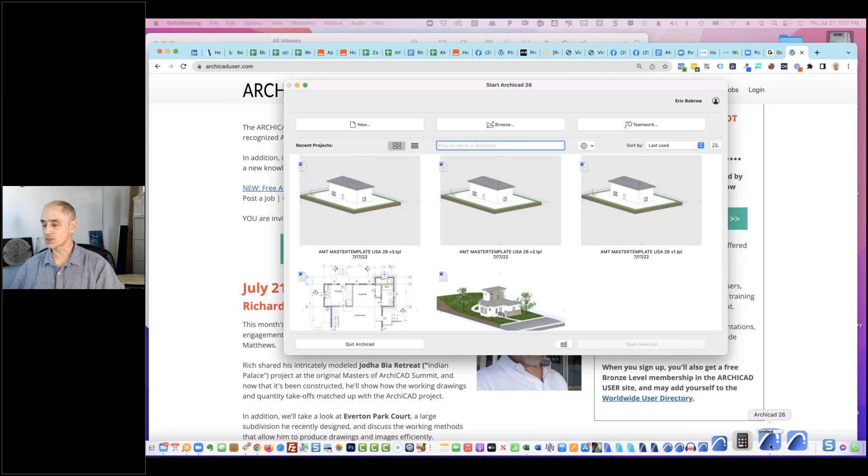All right, so first of all I'll create a new project using the Graphisoft standard template here. I'm using the US version. I've been looking at the international version as well, so that I can support all of you who are in other countries.

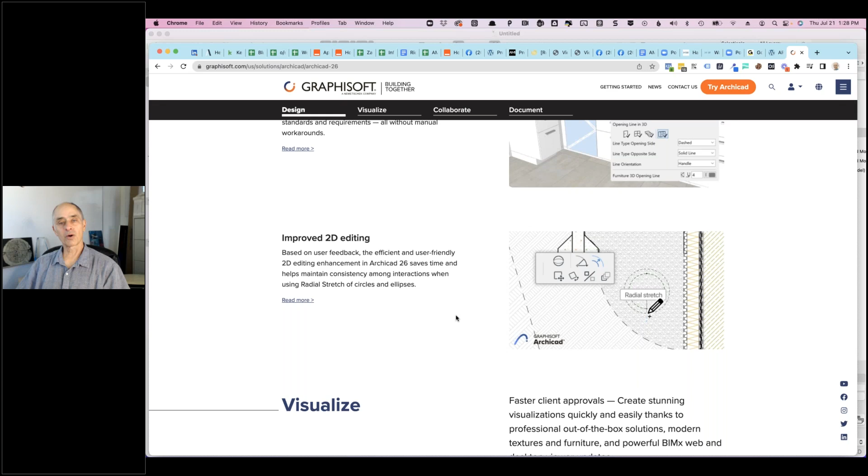Not something to write home about. Improved 2D editing - they only demonstrate or talk about this thing where you have curved elements and you're getting a copy of something that has a larger radius or a smaller radius. I don't know if there's anything else in here, but several veteran users said, oh boy, if that's what they're shouting about, they didn't do very much about anything else. So anyway, I'll be looking to see, because occasionally there are things they don't put in the headlines, but then you find out later, oh, it also does such and such.

All right, so I'm just going through what I see here. Visualization - okay, so they have a new, improved surface catalog. I have not experimented with that, but the images are starting to look better and better. These are native within Archicad.

Well, BIMX - I don't know how many of you are using that, but you can export your model in an independent file that non-Archicad users can access, whether they're clients or consultants, and move around in 3D. They've improved the visualization, and the images I saw were like, oh wow, this has really gone from total cartoon to something sort of like a video game level of realism. So I think that's nice, because expectations of visual representation are getting higher and higher as we see more movies with CGI, computer graphics stuff. Anyway, they've got some stuff with BIMX that looks pretty good, and if you look at this, it looks noticeably better than previous versions. If it's just easy to export that from your Archicad model and send it to a client so they can walk through the current version of the design, I think that's pretty good.

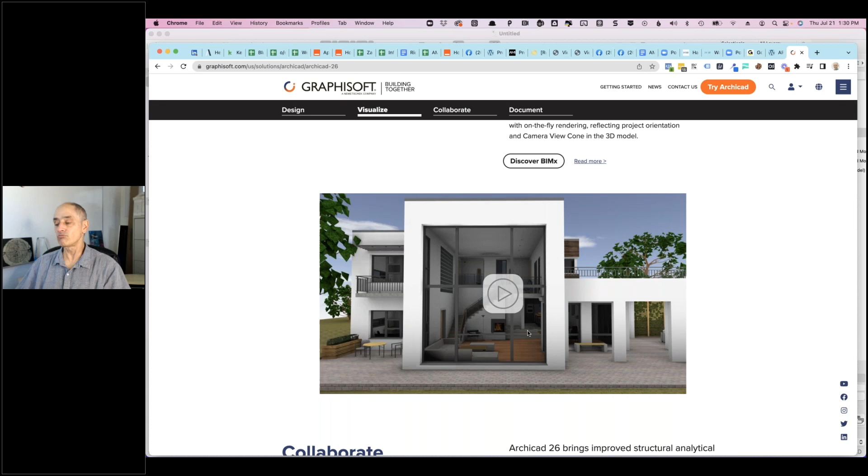The collaboration talk covered some of the underpinnings of the ability to share the virtual building model, the building information model, with other disciplines. I have not looked at how the collaboration tools work, but in general I'm sure they're resolving some issues in terms of file size and speed, while also managing the different representation styles required for different disciplines. And ultimately, the ideal is that other disciplines can use their own tools but participate in an actively evolving digital model, with as few compromises as possible, so that all the stuff you want or need to see is there.

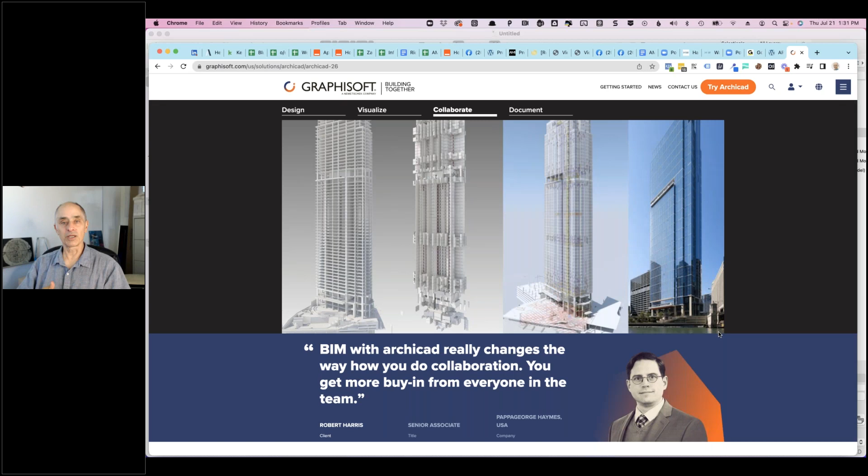Okay, so they have structural workflows and load calculations here, or at least putting in some load information and being able to update that. And I have no idea what FRILO is - I mean, it's some tool that Nemetschek, I think, has, for structural analytical... I don't know what the F is, filter or something - SAF, structural analytical something. All right, support for multi-segmented columns and beams - these were introduced a version or two back, and apparently that now can handle the structural implications of that.

BIM Cloud is Graphisoft's tool for managing shared projects in this digital model that multiple people or companies can participate in. So some of these things you may never use if you're a sole practitioner, or you just have two people in your office each working on your own project, or you open up a project and work on it and close it and somebody else opens it. You may never use BIM Cloud, but I have heard good things about their service.

So whether you're wanting to share within an office or with a remote workforce like we've had in COVID so much, or just simply having outsourced people in different locations, you can now request and pay a very modest amount to have your project or projects up in the cloud that Graphisoft manages. And then you get access, and your team can get access through the cloud. Last I heard it was something like $400 a year or $75 a month for that access. Check with your Graphisoft reseller or rep to find out about it. I think it's pretty cool that you can pay for a reasonably priced service and collaborate remotely.

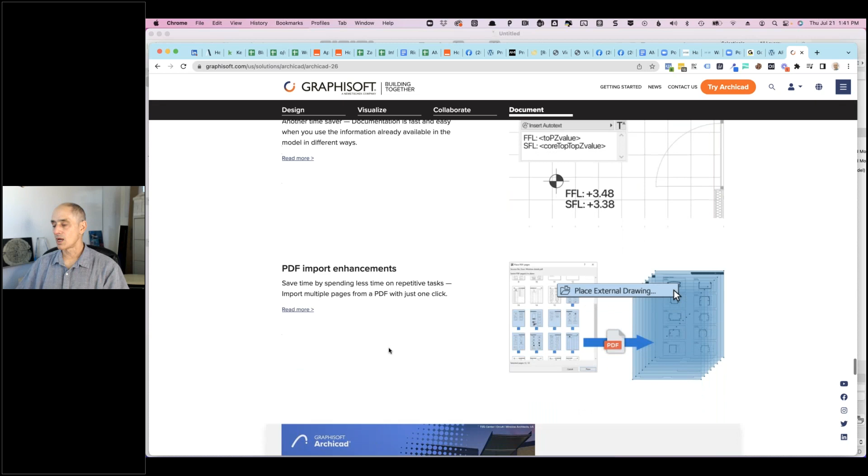Resolves an annoyance. PDF import enhancements: you can now bring in multiple pages of a PDF instead of one at a time and lay them out on a larger sheet. I know people do that in California for Title 24 energy efficiency reports, which may have 3 or 6 pages on a layout. Instead of importing multiple times or dragging copies and fixing which page goes where, now you can select all of them and it will lay them out. Given that we already have auto layout features that create new layout sheets, you could bring in 10 or 20 sheets at a time and they would create new layouts as they fill up.

So that's an overview of an overview, and my perspective on some of the things I see as more useful and less. I'm going to check on questions to see if any of you have questions on what I said or on Archicad in general.

Then I will talk a little bit about project migration - in other words, how do you take your project from 25 to 26, or from 20 to 26, and what things to be aware of, at least the things that I know at this point.

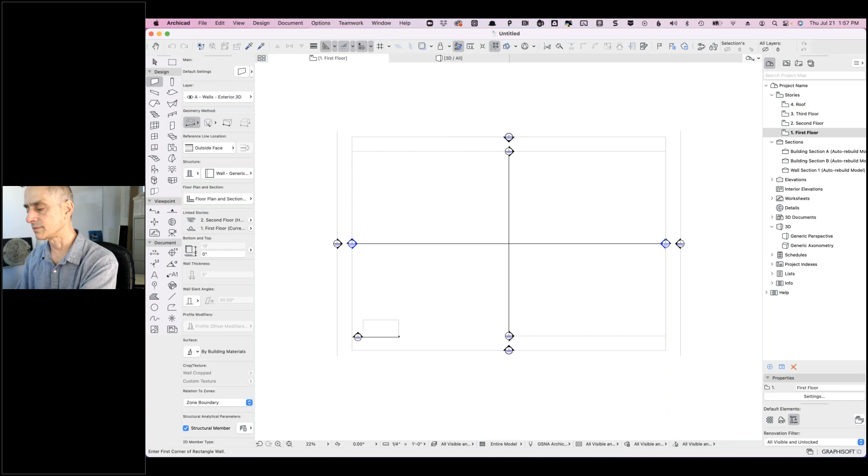Let me go here to master template sample project. Let me open that here. Actually, that's a template. Let me get the sample project open.

So the question is in terms of seeing zones in sections and graphic overrides, that'll be what I focus on for the next few minutes, and then I'll talk about project migration things.

But this, yeah, this is not a sample project. This is just a small piece of building to give some context when you first open up master template. Let me open up the sample project here, which gives me a good context for answering questions.

For those who may not be familiar, master template gives you a starting point for projects. It doesn't provide a project itself, you'll be putting in your own project, but I do have a sample project developed a few years ago by architect Scott Bulmer in California, who was working as a consultant for me at the time. It's a little California bungalow.

It provides context for showing what graphic overrides will do, or other things, and shows how you can create complex profiles to make beautiful sections, etc. I use it a lot as part of my teaching because I've carefully cultivated lots of different pieces as an educational tool.

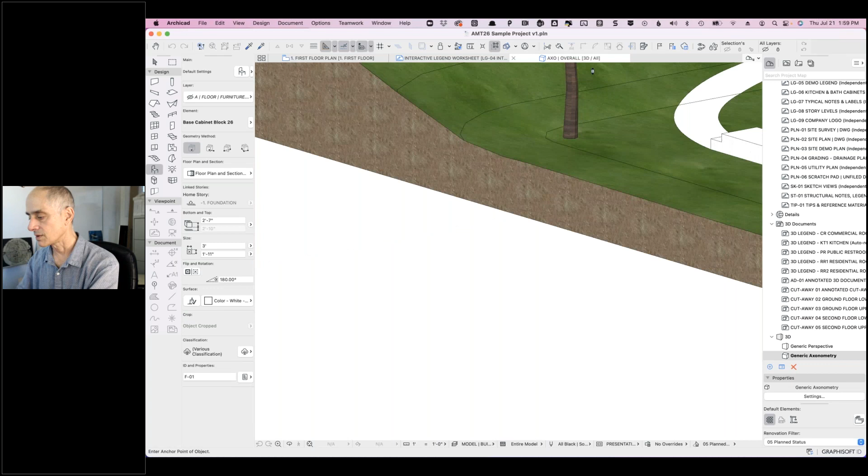So for those less familiar, the project itself here—I'm trying to get it—there we go. Okay, so nothing too imposing or dramatic, but it has a lot of little fine details here.

Now I'm going to show one example. I hope this is fully set up—sometimes I try to demonstrate something, and because this is now in version 26, maybe something isn't going to work. But let me do this in terms of more 3D views here.

3D styles and model variations. Let's see there—color pen, no, let's see. Oh, actually, let's just see. This would be energy here.

Okay, so you see here, this is one of the new features. I'm trying to find a particular view, and in this case I typed in the word energy because I knew I have some reports here, some schedules that are about energy analysis. If I go to energy summary like this, it's not an exhaustive energy summary.

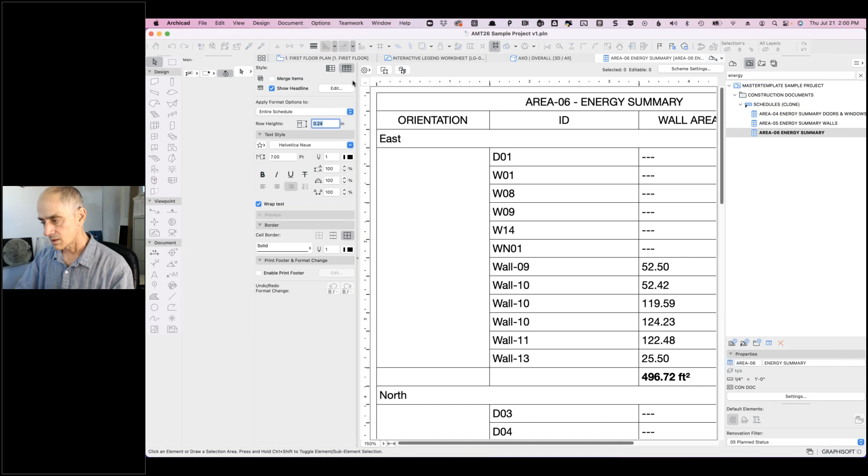What it is in this case, we'll just—I'll shrink this down here. We have a bunch of doors and windows and walls designated as east, some designated as north, and some designated in each of the directions, south and west. This is able to calculate the area of the walls and the area of the openings.

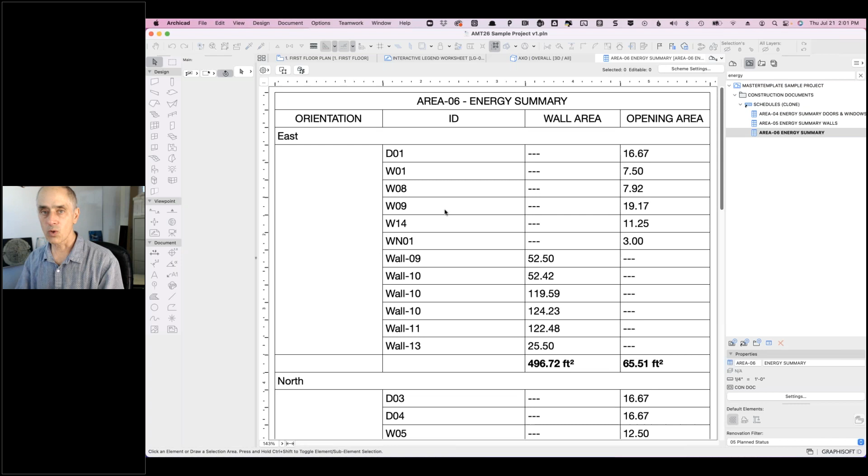This is useful information—it at least contributes to some of the data you'd need for energy analysis in the state of California. You're figuring out how much glazing, how much non-insulated area there is, and you can calculate based on it. Now, of course, how does it know that a wall is east, or a window or door is east?

Well, if I go to this wall and say show it to me on the plan, we'll see this wall is highlighted, okay? And this wall, I've manually gone in and set up a custom field. In master template, I've got custom fields specifically for this purpose, or custom properties. One of them, in terms of AMT as Archicad master template, is the orientation, and it says the orientation is east.

Now I can choose one of the other directions, and I can also say, hey, it's interior, meaning it's not relevant to this type of exterior calculation. And when we first draw a wall, it'll be undefined—it will not be any of these, and therefore it would not show up in the schedule because it's undefined.

Or it'll show up saying undefined, and then you can go find them and make it right. Now is this east? Well, in this sample project, east is to the right. Do I have all of the walls designated properly? It'd be tedious to go and select each wall, particularly in a large project.

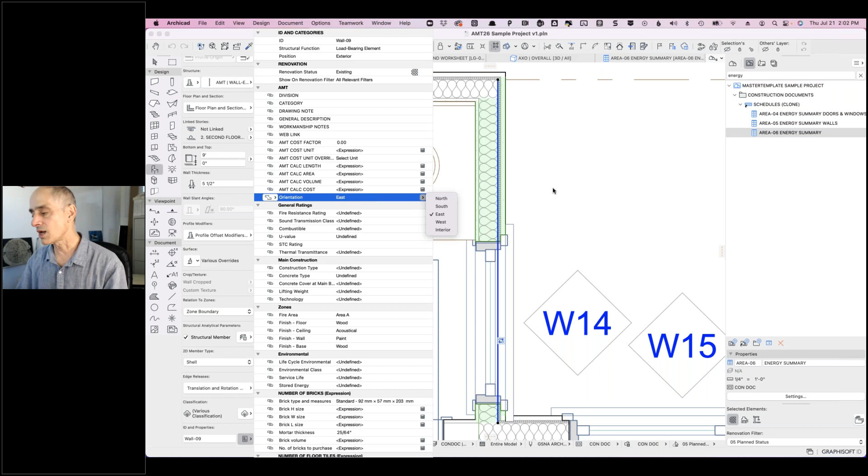So it's nice to be able to visualize this in 3D to check if I'm getting it right. So if I go to the 3D view and take a graphic override here that is energy orientation check, this is going to instantly recolor the walls and doors and windows to indicate what direction has been designated. So I'm going to click on this, and you're going to see.

In this case, it apparently is... I don't have this set up right in this sample project. Something went wrong here because they're all the same color. Let me go to the graphic override rules and fix this. Hopefully I can do this quickly, and you'll learn a little bit about the rules.

If I click on this little button here next to the pop-up, that is the current graphic override. I have something saying: if the orientation is north, make it this color; if the orientation is south, make it that color. So these are some visual text representations here and some visual images.

Now let me check. Let's say, I think this should be south. So why is the south not this color? Let me click on it and see. It says if it's a wall, door, or window and the property is something, then it'll make it the right color.

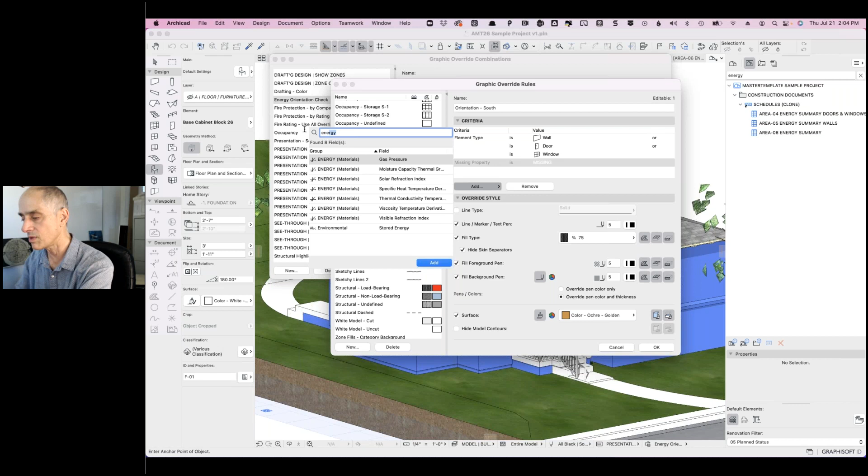So for some reason this missing property means something got broken along the way and I need to fix it. So what I'm going to do is color it this color when the property is energy. Do we have stored energy? No, maybe it's orientation. It's orientation.

So you can see I can type in a search here. I think you could do that already, but I'm not sure—maybe this was added as well. So I'll say the orientation is... and it says this rule is for south, so I'm going to fix that. And then I'm going to get rid of this other one, where the property somehow got removed and I didn't fix that.

All right, so now when I do this and say okay, we should... maybe we have to rebuild here. Refresh, rebuild. No, all right, well that didn't do it. Let's see, what direction is this? We'll see if I can get this.

This orientation is east, okay, and this one the orientation is south. Okay, so we have east and south. Let's just see, the south should have changed color here with the energy orientation check. Okay, well, let's see what's going on.

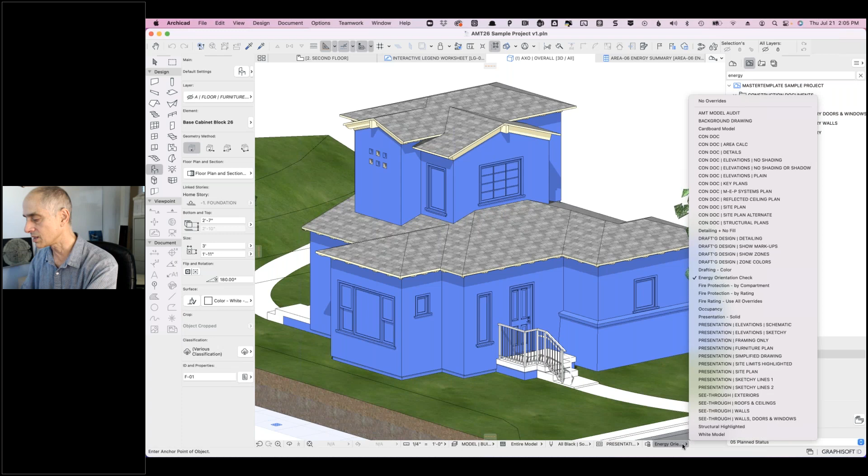So it should be: energy orientation check south should have this color here. So if it's a wall or a door or a window and the orientation is south, then we want to change the surface here. So that should work. I'm just going to fix the other ones quickly because now I know what it is.

But for west, we're going to add orientation, and this is going to be west. And then I remove this one—it's one of these, or more of these—and this, yeah, this should be all right. Yellow. And let's go to the east.

Missing property—so it might have to do with the last one that was missing. I think I have to fix them all, which will just take another 30 seconds here. So I'll remove this and add orient here. If I can pull the rabbit out of the hat, this will be great.

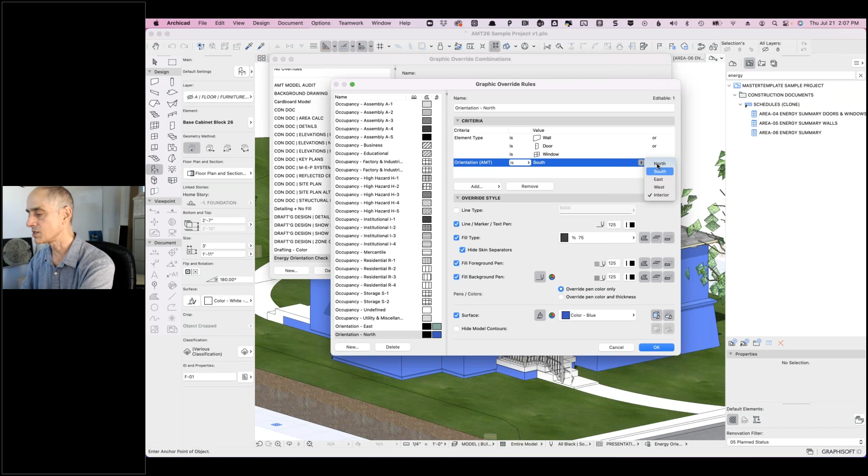East here. And then I think this north one—the problem is that it's applying after all the other ones, and it was basically applying to all the walls. So I'm going to say add again here. Hopefully this will be clear in just a moment. This is going to be: if the orientation is north. Okay, oh, okay.

Hooray. Rabbit out of hat.

Okay, so what this is, basically, when I go around, we can see, did I get all of these in the right orientation? Clearly I did not change the model or redraw the walls. I simply said for a certain type of presentation or study purpose, I want to make sure everything makes sense. So let's take this window and say it's actually not oriented south. Let's say I accidentally had it on east. Now when I'm looking at it, we're gonna see it jumps out. Hey, that's the wrong one, it's not matching there. So I can go in and find the ones that are wrong and say I really need to change this to, I think it was south, if I'm not mistaken.

Let's do that. And I can select multiple ones like that. So this is one graphic override. The rule in a graphic override is you say a rule looks for certain types of elements, and then if it matches that, change its appearance, at least while this override is active.

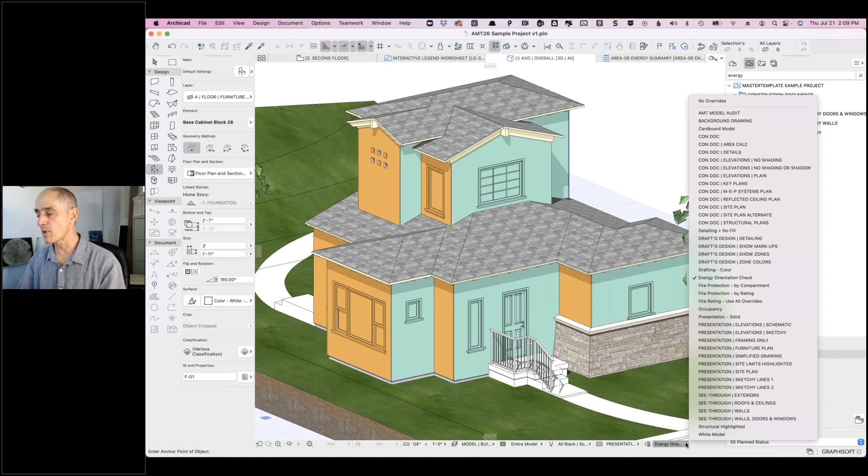You can use this for different purposes. I'll show you another one that's more dramatic. Another one here, we can say cardboard model. That changes the look of everything. What is it doing? The cardboard model says that if it's an uncut surface—right now we're not cutting through anything—the rule is: anything that's 3D, give it a white color. So that very simple rule did it. And there's a separate one for when you cut through it.

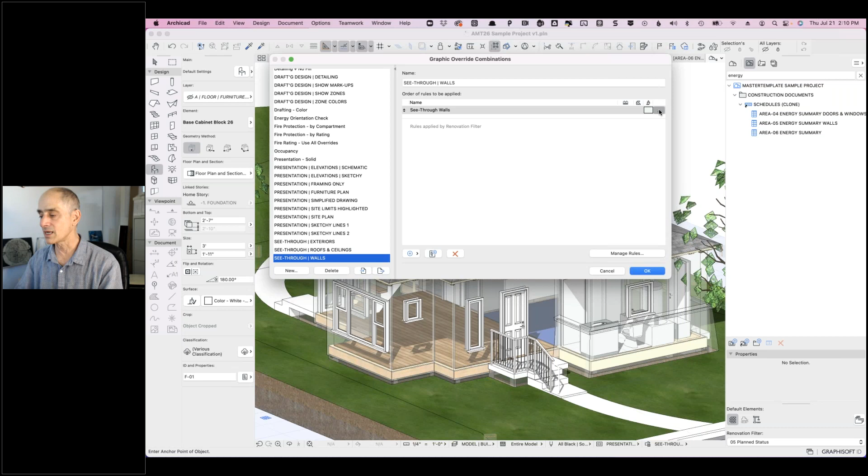Now let's look at another one, more for see-through walls. You can see now we're looking at the building somewhat like it originally was, except the walls have been turned into glass or airspace, I can't remember which. We'll go in here and say see-through walls. The rule, which I can look at or edit, says if it's a wall, make it clear glass, which is different than airspace. With clear glass you can actually see just a little bit of a haze there, as opposed to airspace, which would mean it totally disappears.

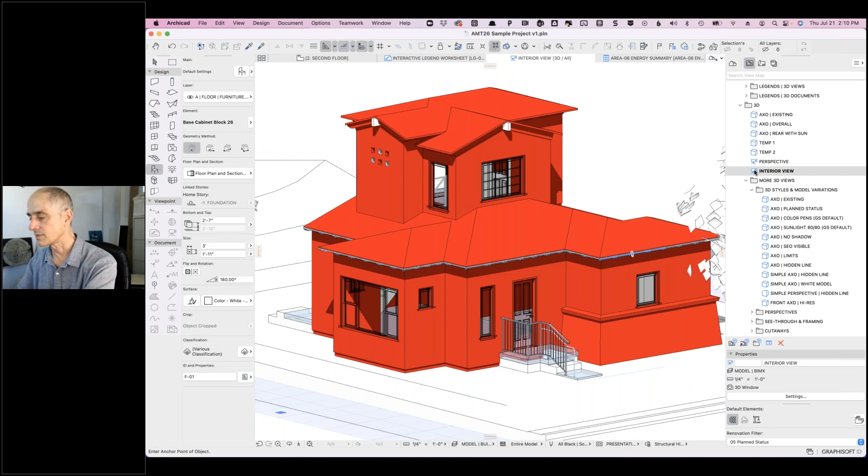Now we can use it for things like structural. Let's see, there's structural highlighted. So all of these walls are structural, but inside the building—now if we were to take an interior view, let's go to an interior view here. This turned off, that saved view turned off the graphic override. If I say give me the structural—where is it—structural highlighted. We'll see what's structural, so the furniture, of course, is not structural. And then I think here there are some interior partitions not designated as structural, and I don't know, maybe the stairs should be considered structural. I don't know, this is just a demonstration file, so it's really just to show different things.

If we go to another type of graphic override, used in plan—let's go back to, say, the floor plan, here, first floor plan, and we look at it. So what are we seeing right now? We're seeing the walls with some detail indicating that they're insulated, that they have certain skins. Well, with the graphic override, we can say, I would like to have this look like a site plan. All right, so now it's just empty walls. We're seeing some grid lines through here, but basically they're empty walls because we're designating the change in the look there.

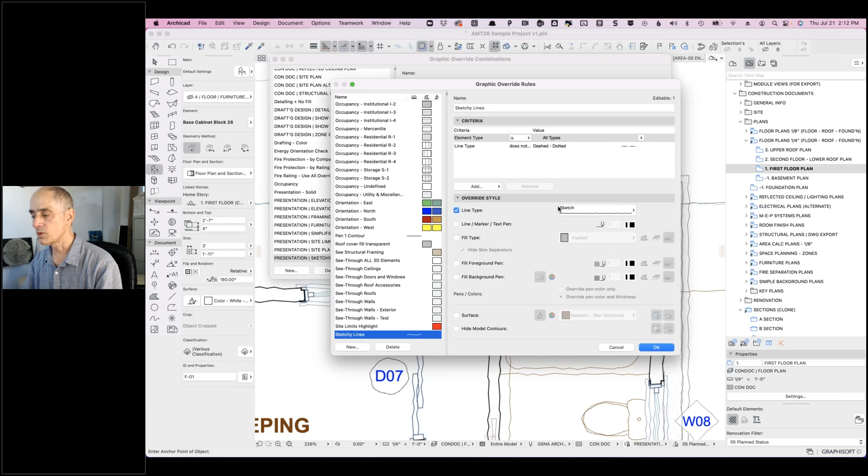Or if we look at something like a sketchy line, this is actually something that goes in and says—let's see, wrong one here—I would like to change the lines that normally would be straight into a sketch line. So those are a few different examples.

We can also have the same thing preset in a view. So if I go to an elevation, let's see, sketch and schematic. In master template, I have a bunch of examples here, so schematic elevations. If I take an elevation here, in the schematic version it removes the details of the doors and windows and just makes everything plain white. Whereas in the sketch version of the same one, it makes it a little bit wobbly, which, at the right magnification, can give just a little bit of a hand-drawn effect.

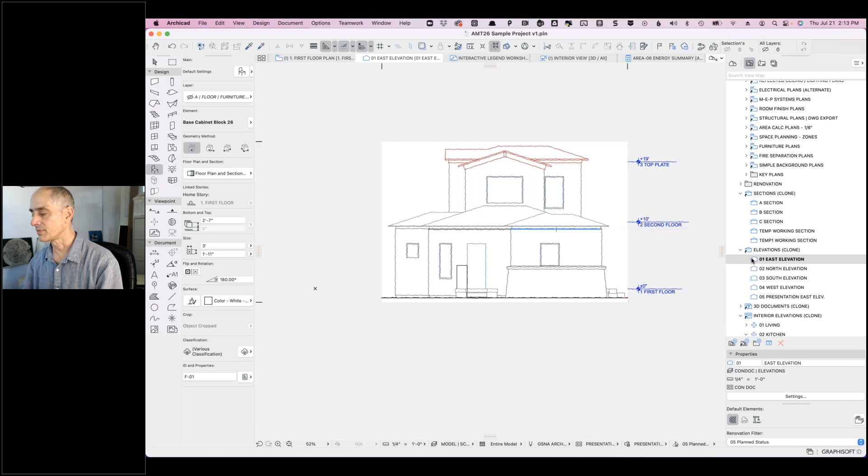And then of course, if I turn that off, if I have the elevations without that, then you can see that this is now showing more detail, and of course a more traditional sort of view.

All right, so hopefully that explains graphic overrides. Now, what's new in 26 is, if I'm in the graphic override dialog here and I want to add a graphic override saying I want to do more things, instead of picking one at a time, you can pick several things and then add them. So sometimes you want to compile a bunch that will all add up, and now you can select multiple rather than doing one at a time. I think that's the main thing. They also changed it from edit rules to manage rules, a couple other small things there.

Now, viewing in section, the zone - I'm going to bring up a section here. Okay, so we don't know what room we're cutting through here and what room we're cutting through there, but there is a zone. Now, if I check the layers here, we have the zones. Our area identifier zone is visible, so that means my zone layer is turned on. But I don't see anything that designates what a zone is. Now I can't remember, let me go look at the section settings. I don't think it's in there, I'm not sure.

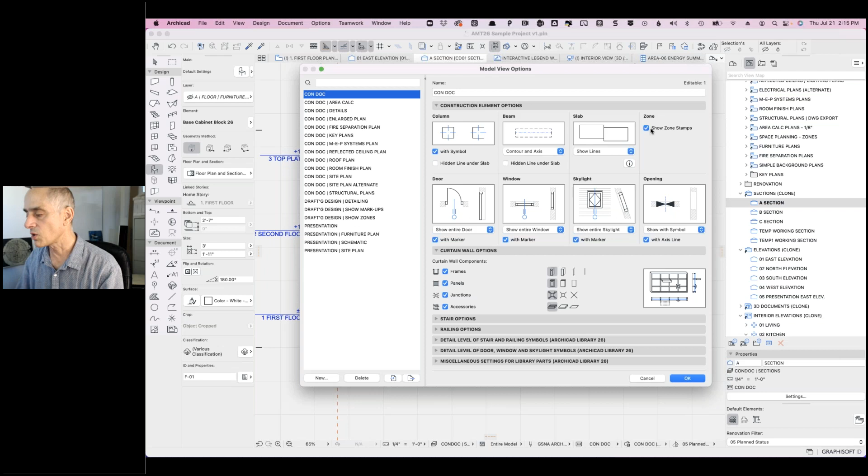Model appearance, where zones are - I think that it might be in model view options. Okay, where is it... shows zone stamps. Okay, so right now that would show it on the plan when we're in construction documents. So it's not there.

I'll select this - this is a wall. Yeah, there's not a zone that's visible. Trying to remember, is it under project preferences, legacy? Here, hide zones. Okay, so I think the default they have is saying people would get confused by this - if you need it, you have to turn this off. This says hide zones. Okay, so now I'll say okay.

Now you can see all of a sudden some of the information has disappeared, which is actually awkward, right? But now if I hover over this, what is this? It's allowing me to select a zone. Now, as a zone, I can label it to show what its name is.

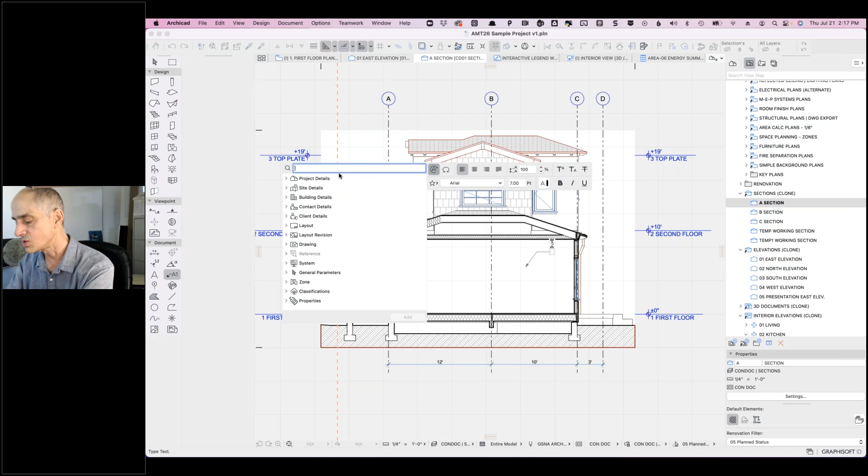Let me just show that. If I go to the label tool here, and hover over - let's say this is a zone right now, and right now it's got an arrow. I'll remove the arrow in a moment, but I'm going to go to the auto text, and we'll say zone here, and I want the related zone name. You can see it says sleeping. Okay, I don't want to do it twice - it just put it in twice there. Now let me get rid of the arrow.

My info box is - oh, let's see, I have to finish it. And then now I can select this and say, you know what, I don't want the leader line, I just want that, and maybe I want it in a frame around that. Now I'm going to eyedrop this here, and now I go over to this area and it says living room. So now you can see the power of it in certain contexts where you're cutting through sections and you want to say what the room is - room 105, or lobby, or storage unit 1, things like that. So this was a label that said show me the zone name.

Now, one thing we're seeing right here is that the zone is blocking the view of the stair, right? Now, I'm trying to remember what the solution is here. If I go to section settings, I think that if we turn on transparency - let's see, transparency - that might resolve it at the cost of some other complication. Let's say okay.

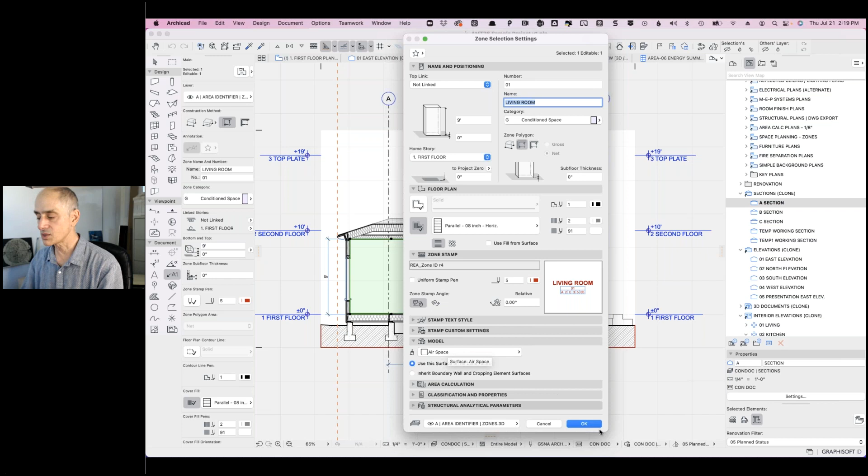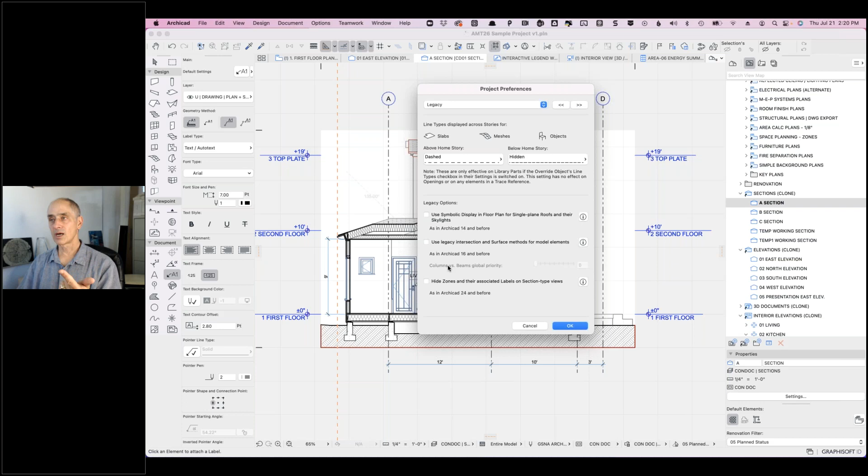Yes, so we're seeing through airspace, not glass. Now we're seeing through the zone. I'm not sure whether we're seeing through the window, because there's probably not a lot of detail behind there in this model, but there could be complications where we're seeing through doors or windows, and we don't want to. I haven't experimented with this too much, given the setting I just changed, which is in options, project preferences, legacy, and this is global for this project. If we say don't hide zones on section type views, we may have this issue that we're seeing through certain doors and windows, for example if we have transparency.

Can I turn off transparency? Let's go to section settings and turn off transparency and see what happens. Yeah, so we need transparency, and we need the zone to be set as a very transparent element, and that works nicely here.

We have two compromises. One is that if we ever do a bubble diagram with the zones in 3D to show the spatial usage, you may be limited to things that are very transparent as opposed to translucent, to be able to see through. Secondly, whenever you want to see these zones and you turn on transparency, you may be seeing through doors and windows to rooms beyond. So that's at least another potential complication.

All right, so hopefully that's of interest.

All right, so now I see some questions from Jacek and David Yaguchi and Saxon. Okay, so Suleiman asks, how do you activate the graphic override command?

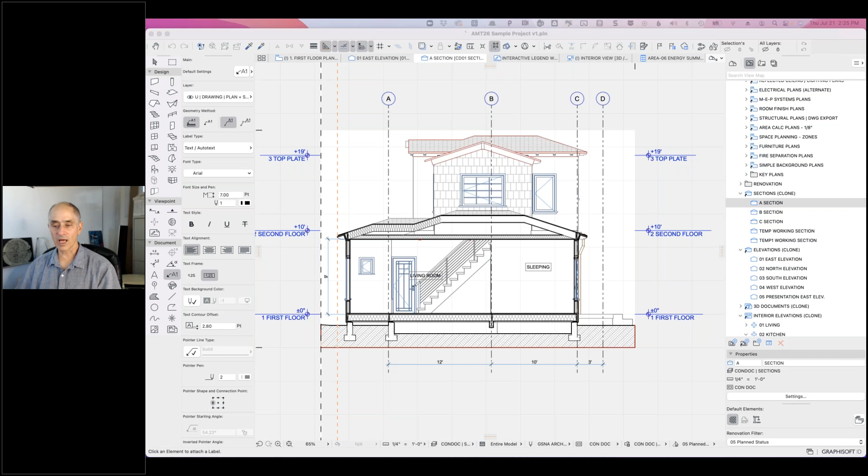Okay, if I set a project at a particular elevation above sea level in my location settings, and I want to change that elevation of sea level for my project to be higher, can I change that in project location, and will that automatically move my model higher? Good question. It's actually a little simpler than you might think.

Let's take a look. Well, we have this interior view - let's go to just an axo view. Okay, so we have a site mesh in this project, and if I go to the measure tool and hover over this, it says that this point in space is z coordinate -1'4". Now what is that?

So it's -1'4", so like half a meter down from the floor level here, down from the ground floor, from Project Zero. So how do we know what Project Zero is, and how do we get elevations related to sea level? If I go to the options menu, project preferences, and look at location settings—and this may have somewhat different names in other versions of Archicad, it might just say location, or project location—we can see the elevation. Right now this is set at 102.67 feet. You may recognize 0.67 is 2/3, so that's 102 feet and 8 inches above sea level.

Now if I go and select a wall—these all have our complex profile, but we'll just select this wall—it says its base reference is 0 in relationship to the Project Zero, and that it goes up 9 feet. Now I can also say, where is it in relationship to sea level? Remember I had it as 102 feet 8 inches. It's going to say that, 102 feet 8 inches. So it knows in relationship to sea level where we are.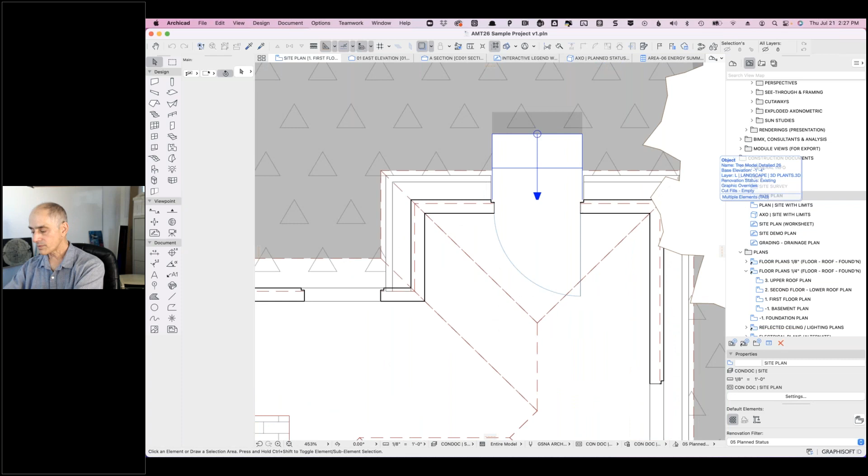Now, if I go to the site plan here—this site plan drawing has some spot elevations, 102, 104, etc., and 101.33, that's this. So when I put in a level elevation point here and just click to place it, it says 0.842 feet.

Now, what is that? Well, that means this is just slightly above—it's not quite a foot above the floor level. That's not too useful in this case, because for grade, we'd want to be in sea level. Maybe we'd want to say that a mezzanine or a landing is so many feet above the floor level.

But here I want to change it. So I'm going to select this marker and say, how do I want the text to be? It says single value—this is new in version 26—and I can say visible, top to sea level. This is brand new. There was a way to do this before by editing the text itself, but now you can change it right in the marker.

So now I change it to that, and it says 103.509. Okay, so it's the right number. Of course, it's showing it in decimal, which is what all of these are set to right now—we are showing elevations in decimal.

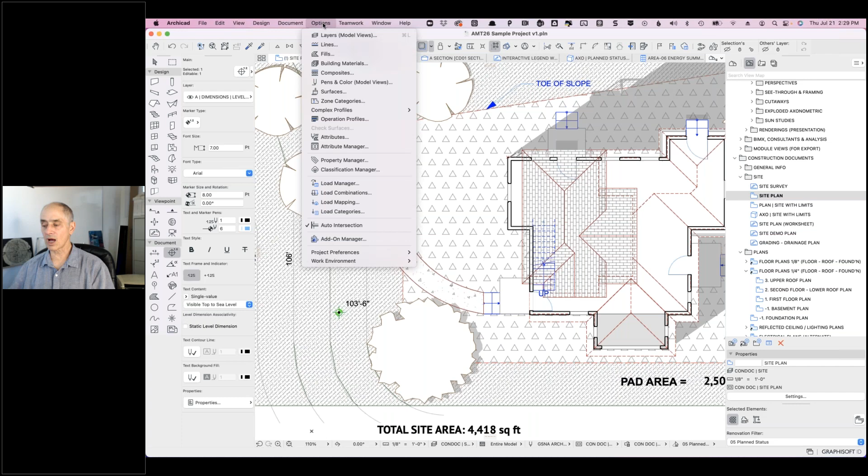Why? Because in the site plan, I think that's what it's set at. If I go under document, options, project preferences, dimensions—right now in site survey, the level dimensions are set as decimal feet. So if I wanted to, I could just say, what would it look like if I switch this to feet and fractional inches? Probably not what you want here, but let's just do that. Now you can see 1036, and that at least is updated. I think this text here might be fixed as opposed to something live. Anyway, that was just on the fly changing my dimensions to a custom setting, whereas in the site setting, it was set up to be decimal feet.

All right, so now, this says single value, and we can also have multi-line, and there are some other options here. Graphisoft does teach you how to do this, but I'll say that most of the time people will want just a single line, showing the top relative to either project zero or to sea level. Once I've got that set, I can use that as a preference for all future dimension things.

Now, getting to your question, David: suppose we realized that the site was set incorrectly, or maybe we don't even have a site, we just have the building design, and we're going to put it in a new location, a new site. Well, what I can do is go to options, project preferences, location settings, and say, actually, the new site is going to be up at 125. Now, what happens when I do this? It simply makes a note that sea level is a different distance away from the project zero.

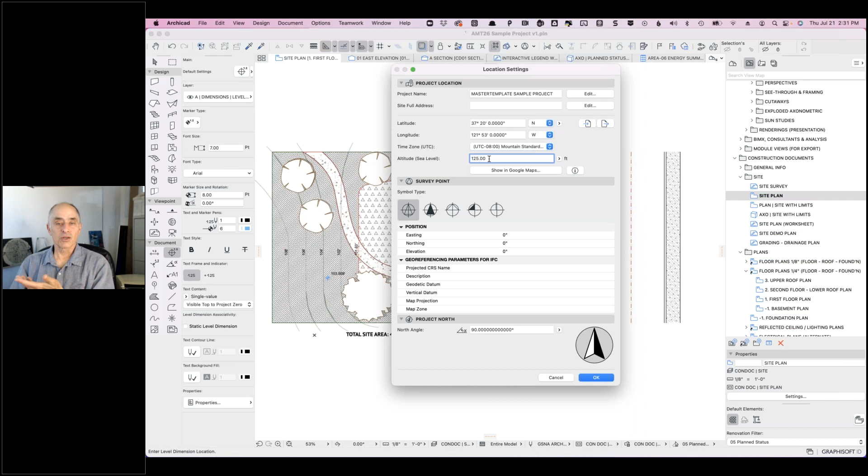Everything within the project is based on project zero, meaning all of the elements like the walls, roofs, slabs, etc., just stay still because we haven't moved them. We've just said sea level is further down. So I'm going to say okay. We don't see any change here. If I go to the 3D view, we won't see any change here.

But now if I were to measure this point here, what does it say? It says Z coordinate minus 1'4", that's again 1'4" below that. But if I go back to the floor plan here and we zoom in on it, it says it's 125. So basically it's simply saying, oh, if you're telling me to give you the distance from sea level, I will happily tell you that is 125 feet. Okay, so that's what happens when you change the project location.

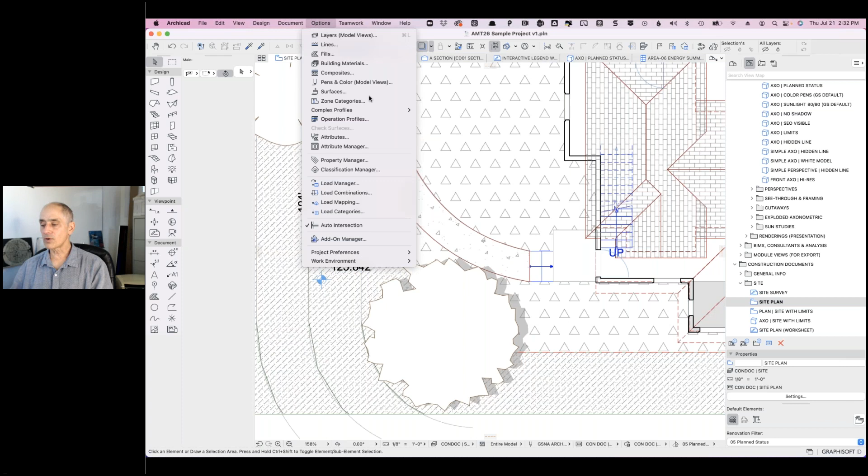Now, there is another area that you were asking about, reference levels. So if I go to project preferences, and there's something called... where are they now? Reference levels here. All right, so you can see there's the minus 125. Now, it is gray here because you can't change it here. You have to change it in that other place, the project location.

And can we even get there? You can't get there from here. You have to go back to that menu that I had. Anyway, so this is locked. Project zero is also locked because project zero by definition is zero.

Now, what are these datum points and altitude points? Okay, you can rename this anything you like. Maybe this is street level, and street level is minus 6'8" below my ground floor. Cool. You're just saying the street level is this distance.

Anything that I put in here, and you're limited to 2 extra references, you can pull up in a dialog box, meaning you can see or set the height of something relative to a point of interest. So that might be in relationship to some survey point or some point on your property that you can't be above that more than a certain amount, or other things. It might be related to an adjoining building, or some other hardscape, anything that you want. So anything you want to just have an easy way to reference and say, well, how is it in relationship to that? You can define in here, and you define it in relationship to project 0.

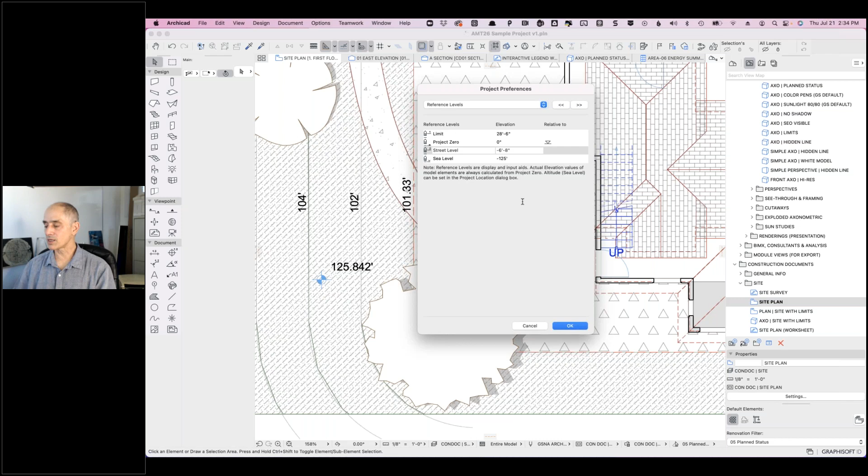Now, if we say this is, well, I'm going to say limit here, and let's say that it was 28'6", all right, you see how this row jumps up. So it'll keep these in order of height, elevation there. And then you can say, well, what's the peak of my roof in relationship to the limit? And you say, oh, it's -2 feet. Okay, good. We still are below the limit. Okay, so hopefully that explains that.

So, David Uguchi, you said the wall is relative to the story, not project 0. My point is, what would it take to raise the entire building relative to existing grade? All right, now that's a different question. Raising the entire building relative to existing grade, you could basically go into 3D, turn on the building, either hide or lock the grade, and literally drag it up. You can select all the stuff in 3D and say elevate, and you can move things up. So I will demonstrate 2 different ways to do that.

We could have another 20 minutes on this, but let's just do something really quick. I don't know if I have all the layers turned on, but I certainly have most of them on right now for visualization. I'm going to go to the terrain and the road work, and maybe this is, let's see, and this paved area that is part of the terrain.

And I'm going to lock these. So I'll go to the edit menu, locking, and lock them. Okay, you'll see the handles turn gray. It's a little hard to even see them in here, but now I can't move them. Now I'm going to go and select everything else here. And I think I can go to the edit menu, move, elevate. And let's say that I wanted to make it, I'll just do it dramatic. I'll make it 10 feet taller.

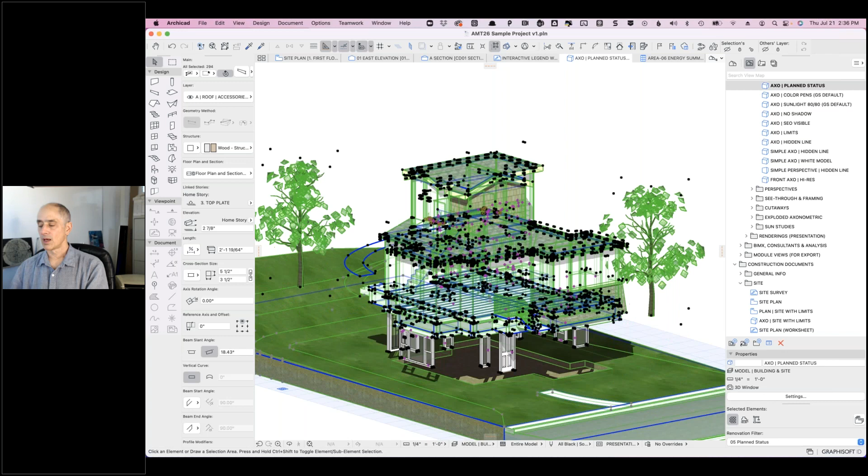Okay, so you can see the building moved up. Now we did have a problem here. You notice these windows and doors didn't move up. Why? Because they were locked in relationship to the story, and the story level did not move up.

Now there are different ways you can lock in windows and doors. You can say it's in relationship to the wall, or it's in relationship to the story. So let me undo that and show you one type of fix here.

I'll undo here. I'm going to select all the windows and say that in general, I want the anchor to not be related to the story. I want it to be related to the wall base. Now I believe that when it does that, it does not move anything. It just simply records where they are in relationship to the walls.

And I'll do the same thing with the doors. I'll select door, select all doors, and I'll say that their sill is going to be related to the wall base. All right, so now the model still is intact.

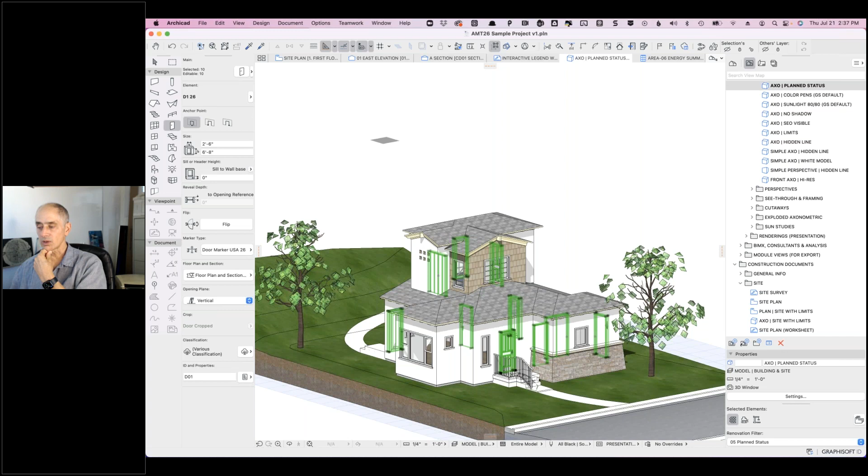Now if I go select everything, select all, and elevate, and I have to say 10 feet. Now the building moved up. Site did not change.

Of course, maybe the reason you're doing it is because you were buried in the site or you were too high above the site or something like that, and you needed to adjust it so you wouldn't end up with it floating like this, unless you were throwing in another story below it or something like that.

Now there is an issue with this approach here, and that is that now when I select, say, a wall, and I look at its settings, while it says that it's now 135 above sea level, that's no problem there, and it's actually 9 feet tall, that's the height of the wall, but it says that it's 10 feet above the first floor. So in other words, the floor level hasn't changed.

And when we go to a section, we're going to see something really odd here. So if I go to a section here, you can see these floor levels have not changed, and the building has moved up. And I'm not quite sure what we're seeing here.

Oh, those are the zones. The zones were not turned on at the moment that I moved things, so the zones actually stayed below. So that's the other thing, is you have to make sure you have all the layers turned on.

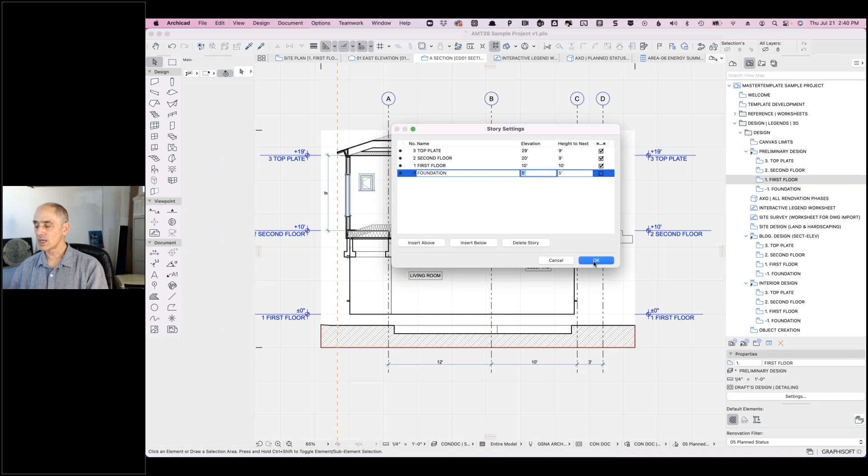But the problem is that when I do it that way, while these story levels move up, the building elements move up as well. And in fact, the terrain mesh would move up with it. This has some issues doing it this way.

So let me, fortunately, I can just go and say that it's going to be 0. Let's see, I'm going to make it -5. And this is going to be 0 and 10. And this will put it back to where we were a minute ago, where these levels were lower there.

So now we still have the problem that we've raised the building up and it doesn't have the right relationship to the story levels. So I'm not going to be able to finish all the demonstration. What we'd want to do, ideally, if you want to change the height of everything, and leave the building design where the stories match the building structure, you would want to change the relationship to sea level.

So, like I showed earlier, I want to make it 5 feet higher, 5 feet lower, whatever. So you change that, and then you compensate by moving the grade element, the mesh, an equivalent distance. So what happens is the story levels still are related to a project 0. The walls and building elements are still related to that same place. They essentially haven't moved. We've told it to be a different height, and we've moved the terrain to coordinate with that height. So that would be the ideal way to do it.

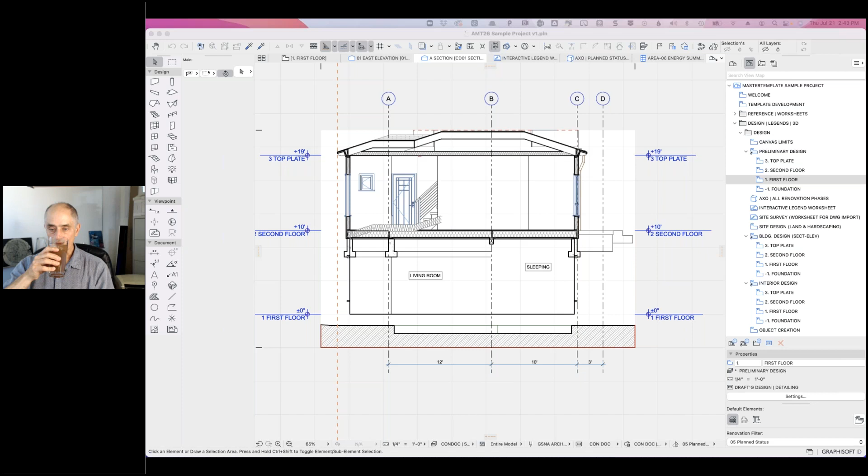Well, my thinking on this is that when you locate the building, you set the project location at a certain height, which becomes project zero. Why can't you just change the elevation at the project location, and that would automatically change everything? I did that first, and it works beautifully.

And then you just need to adjust the terrain mesh, because the terrain mesh, if you've already built it, is based on its relationship to project zero, and you need to move it so it has the proper relationship to sea level. So yes, you can go from the other direction: I want it to be 1 foot higher, therefore I'm going to change my project zero to be 1 foot more. Essentially, project location, sea level is down an extra foot, so the building is officially 1 foot higher, and then you just adjust the terrain that same distance.

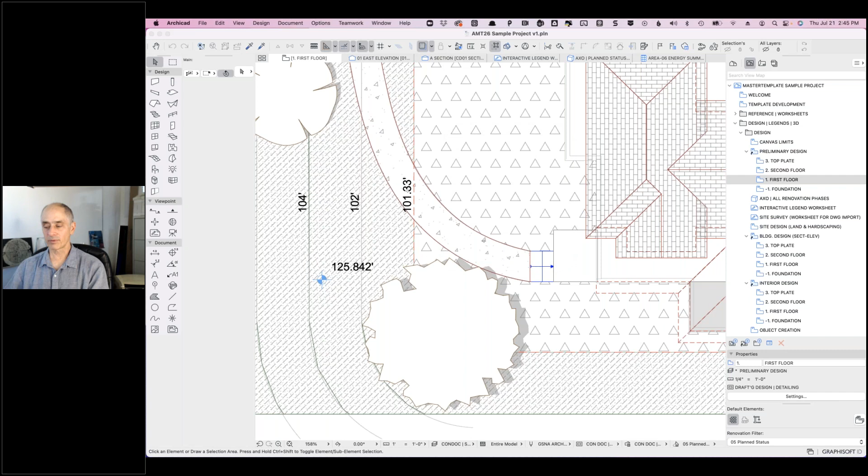So could you just take your whole terrain mesh and elevate it 1 foot less? Yes. So let me simplify this, I'm going to open the original version of this project, not saving any changes, so we're back to a project that's reasonably set up, aside from the fact that I corrected those.

So what I'm getting at is that you could change your project location to be 1 foot higher, and then you can manually go into 3D, select your mesh, and lower it 1 foot. There you go, and that'll work.

Now that I've demonstrated a couple of things that work but have some drawbacks, we'll try this one, which is probably simpler. So here, if I were to measure this right now, this point is -1.4 foot on the Z, in relationship to the building. Let's say I wanted the building to be 1 foot higher but keep the story levels all working.

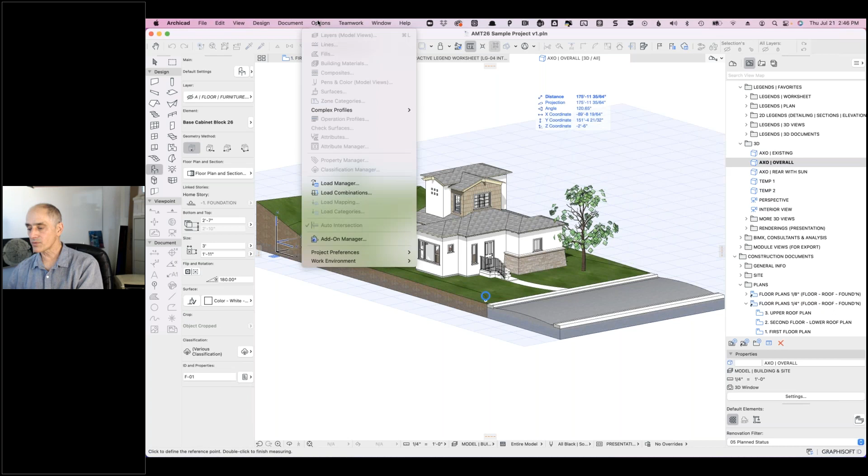What I do is go to Options, Project Preferences. Let's see, can I do project preferences in 3D? No, I can't. All right, I'll go to floor plan, Options, Project Preferences, Location Settings, and say, instead of it being 102.67, we're going to move it up 1 foot to 103.67.

Okay, nothing changes here, nothing will change in any of the views. But when I go to 3D, if I want this to be the terrain, I take the things that are...

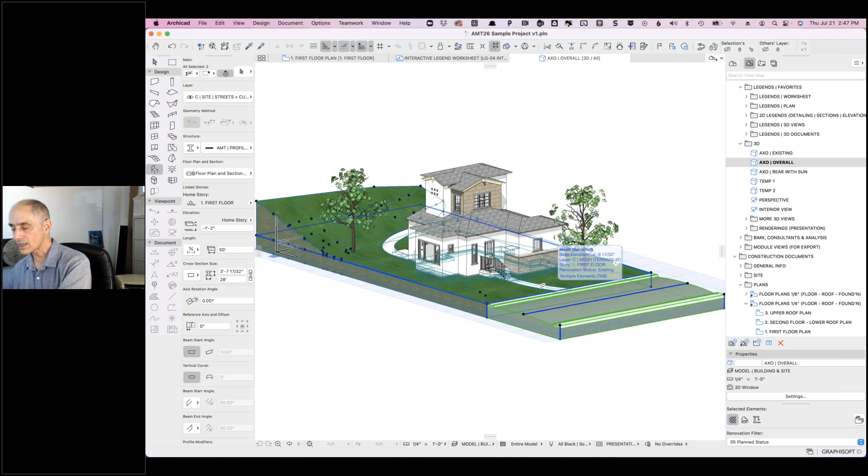One more thing then, if you could go in, select the mesh for the terrain, go into the selection settings on that, you'll see it's tied to a story, just like any other part of the project. If it's set to home story as first floor, and your project zero is -2 feet, you could change that there.

You could change the project. I'm going to select multiple related elements here, like the road and other hardscape, and say move down 1 foot, and these will move down 1 foot. The building now is still in the proper relationship, so if we go to one of the sections, we will see that.

Yes, and then so all the terrain still stays relative to sea level, correct? Yes. Okay, I was confused, I always thought that setting things to sea level was actually tied to sea level, but it's actually tied to project zero. That was confusing to me.

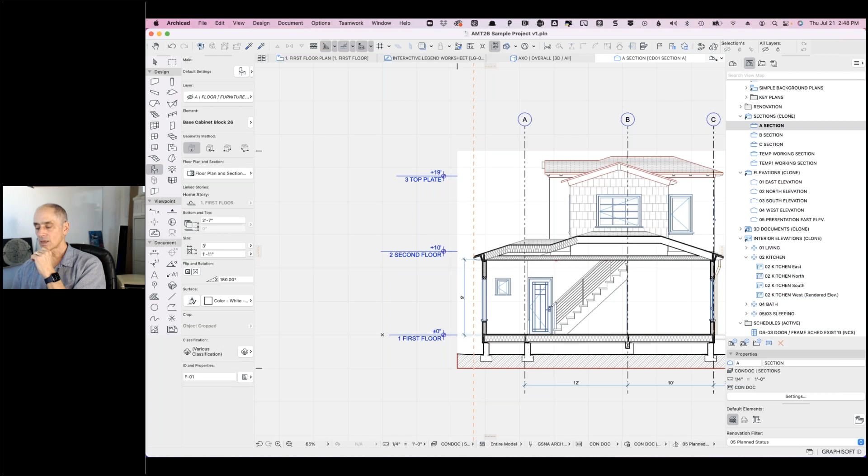Yes, so if we look at this terrain mesh and the piece we're seeing right now, the terrain mesh has a relationship to project zero, in this case 2'4" below, and it was 1'4". You may recall I had it at 1 foot. Yes, okay, that's clear.

Okay, so I have some other questions I want to get to, but thank you, David, for an interesting challenge, demonstrating both the wrong ways, or the ways you could do it that have some issues.

Thanks, Eric. Now Saxon says, when I do that building lift, I found it can work to lower the grade, which is what we ended up with. Okay.

Note this for, okay, Saxon had a question. Let's see, Saxon, trying to get a high res JPEG. Let me open up Saxon's line. So more of my old clients. We're all getting old, I suppose.

David, well, both of you probably have known for 20 years. Saxon, older and wiser. Yes, definitely. Okay, so you had a question here, trying to get a high res 150 to 300 dpi JPEG from a 3D view, and it seems hard to do.

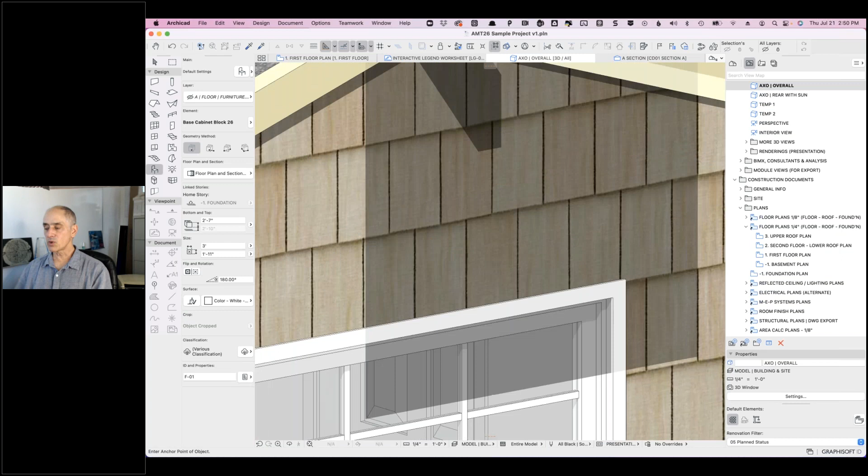Okay, so let's take a view here in 3D. When we're in the 3D window, I've got a resolution on my monitor, which is being broadcast through GoToWebinar, so it'll be potentially a little different on yours, but it has a certain resolution. Now as I zoom in on something, it fills in the gaps and does its best job possible.

But if I take a screenshot from out here and zoom in on that after I've taken the screenshot, then we're going to have a very limited result, it's going to look very fuzzy, pixelated. Right, so that's the issue you're coming up with.

Now let me jump in for 1 second. One thing is I'm using the white model with shadows because this is for a coloring book that's going to get printed in our Sacramento AIA chapter. So I'm trying to get clean, unfuzzy, unpixelated lines, that's kind of what I'm after here.

All right, now in the 3D view options, one option is white model with shadows like this. Yeah, now this is still a pixel-based image, even though it looks like it's just line work. If I zoom in, it'll make better, more pixels to make it detailed. But if I do a screenshot, or save as JPEG, it'll be limited to whatever dots are seen on screen right now, so it won't be very clean.

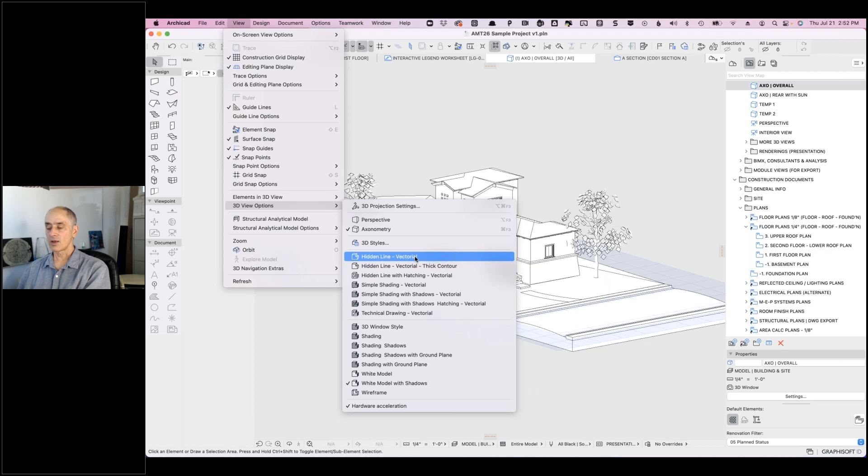The workaround for your particular solution is actually fairly simple. We go to the 3D view options, and go to hidden line vectorial. Now, hidden line or vectorial means it's going to create line work that is pure abstract information. It takes a little longer to generate, and it may look a little different in part.

Well, right now we're seeing transparency through there, and we could turn off the transparency in the 3D window, let's just do that. So I go to the 3D styles and say, when I'm doing hidden line vectorial, I do not want transparency. That changes the setting, at least right now, for this. Okay, so now it looks cleaner.

All right, if I save this, if I do save as, instead of saving it as a JPEG, which is going to just have the resolution we see on screen and will be fuzzy and chunky, I can save it in a vectorial format like PDF. All right, so let's do PDF.

All right, so we'll just do test 3D white model. I'll put this into downloads here. Okay, now what I'm going to do is open up, let's see, go and get that file.

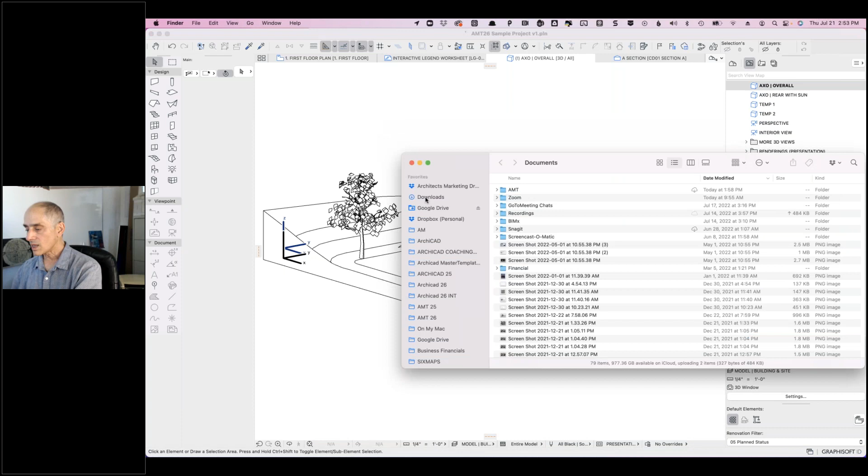Well, it turns out that when I did the PDF, I wasn't paying close attention to the page size, so it put it on multiple pages. But you can see how clean and crisp this is, even though I've zoomed in. And if I do even more, you can see it's absolutely clean and crisp.

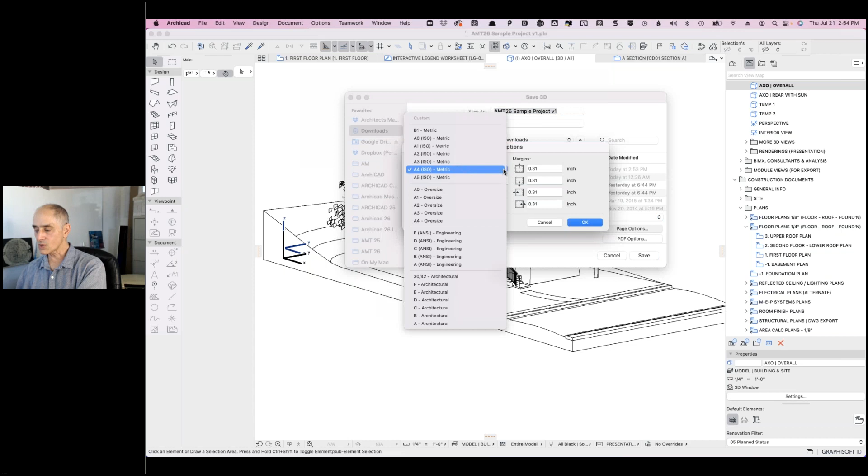So we'll go back to the Archicad environment, and this time I'll save it more carefully, saying I want to fit it on one piece of paper. So now if I do save as and choose PDF, there are some options for page options and PDF options. If I go to page options, I can say what size paper do I want this on. So I'll just say, I guess 8.5 by 11 is considered ANSI engineering, and that it's landscape, so it's horizontal, which matches there, with some borders. Okay, so that's the paper size I want.

And then in PDF options here, you can see it says, oh, well, you're going to need 8 sheets. It says, no, no, no, can you fit it to 1 sheet? Got it. Okay, and now that I've done that, it will save this entire view in a vectorial file.

You know, a PDF. Yeah, so let's just call this test 3D white model V2 here. I'll say save.

And then we'll go and open it up. And it's just, there it is. Open it up, and here is that sheet of paper. You can see that's the sheet of paper. And if I zoom in on this, that's pretty decent, pretty decent.

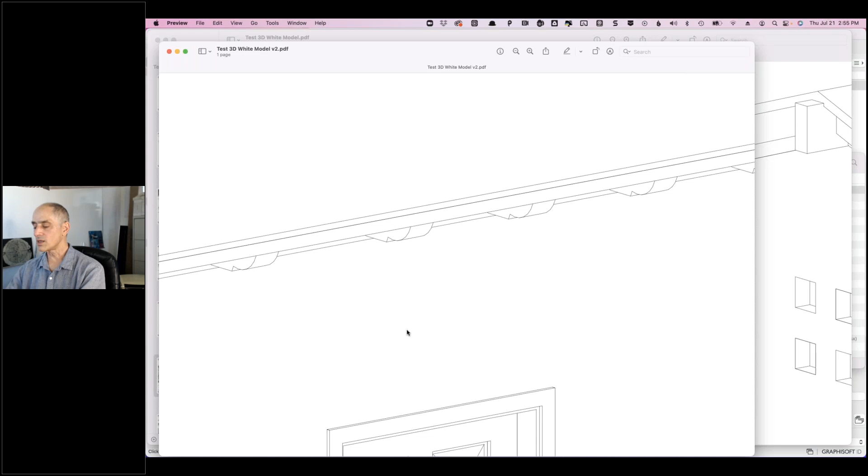And you could then save that out as a JPEG. Yeah, I mean you would be in, yeah, so I'm in preview. You could be in any tool that opens PDFs, and you can save it out as a JPEG at that resolution.

Gotcha. So can you just go back to your, when you got, I think you were in your on-screen options. So this is under the view menu, yep.

3D view options. We have pixel versions, which generally are very fast, and we have hidden line or vectorial versions, which can take somewhat longer or even quite long, depending upon how complex the model is. Hidden line vectorial will, of course, just be line work, no shading. You could also get simple shading with here. Now, what's that one, of course, is looking very thick lines. Why? Because that particular 3D style currently is set to show contours that have a certain weight.

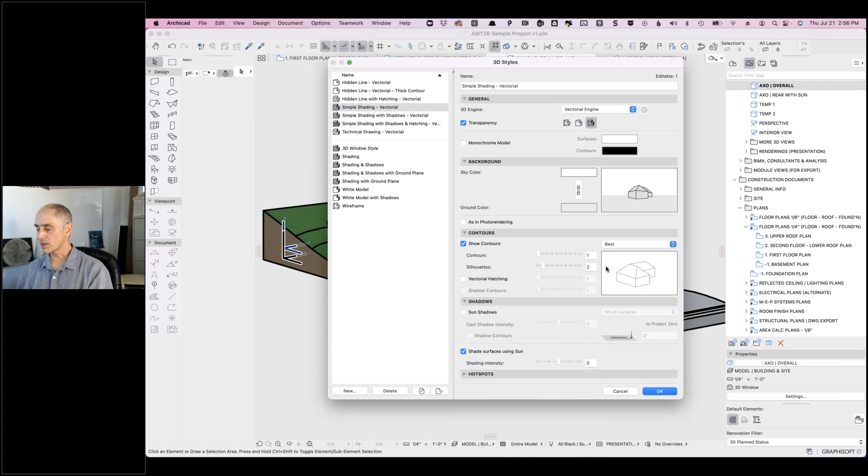If I were to make it thinner like this, then that weight will be a little lighter. If I want to stay with the, because I've got the white model with shadows, will that be a problem with that vectorial line work that you were talking about?

All right, let's see. So we're going to go to hidden line vectorial here. So that's the one I had. And then I'll go to the 3D styles and say, can I add shadows here? So sun shadows. Yes, we can add sun shadow on all surfaces. Okay, say okay.

Not, oh, well, you know, what we're seeing is just line work here. Yeah, that's the shadow there. So of course it's a little hard to tell that that's a shadow. So I'm not sure, what we might want to do here, this would be an interesting combination of effects.

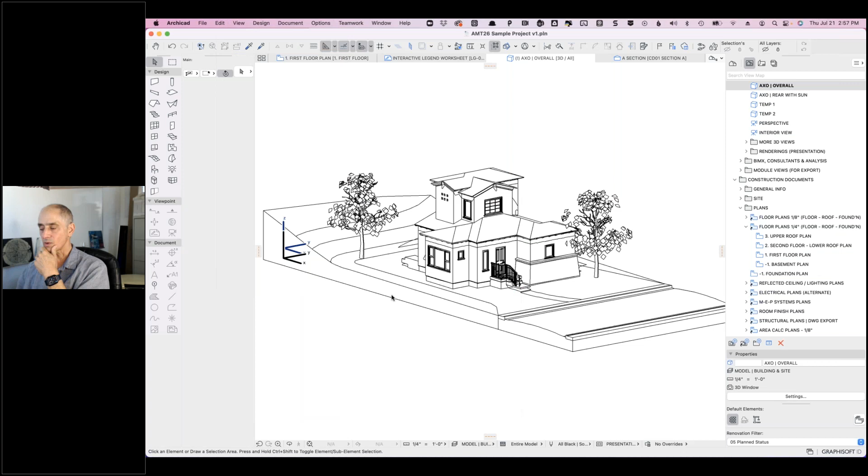Let's go and say simple shading with shadows. So that's going to be with the shadows. We can see those, but we want it to be white just with shadows. So instead of relying on this, which can, you know, I think the shadow was all white, I'm going to go in and say I'd like to make a white model with the graphic override.

Oh, interesting. All right, now we do have some heavy borders and some thin borders, and I'm not quite sure what the difference is, so let's just see what we've got. You can see thin ones and thick ones. Now this is interesting, because it's almost like the way you architecturally would say, hey, if it's against the sky or whatever, we want a heavy border, but we do have this other thing, and it has to do, I think, with the pen weights.

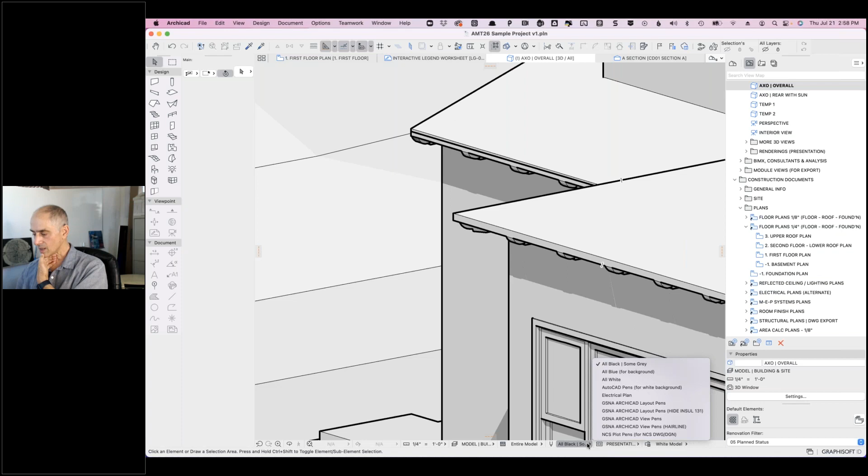So let me just go now to say this is all black, some gray. If I were to say Archicad layout pens, is that doing anything? Did not change. Let me go to the all black, some gray, and let's just see if I can override this. Now, it might also have to do with on-screen view options.

No, it doesn't have that. There's no bold things that they're not on in 3D. But let's go to our pen. Where is it? Pen sets.

Let me just create a new variation of it. I'm going to select all the pens by shift clicking from one to the end and say the pen weight in millimeters is very thin, 0.09, something like that. This is now a custom pen set I'm experimenting with. We'll say OK.

Still seeing... wait, now I was thinking about it. No, but it's still got some differentiation. So why would this be? Because we're seeing it on the edges here, but not this edge. So I'm not sure what's going on there, why some things are thick and some are not.

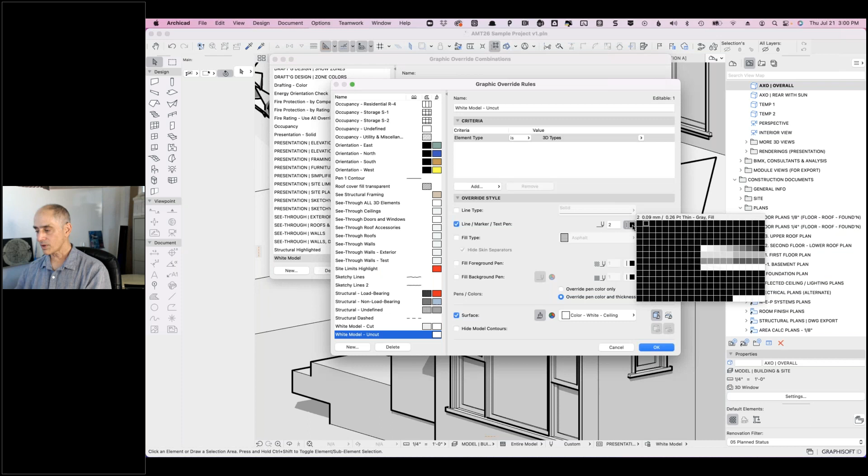Now the white model, if we go here, white model cut and uncut here. So uncut is, we're saying line marker pen, yeah. That's a pen 2. Yes, that should be thin there. And the cut, I don't think... pen 22. Let's just say pen 2. I don't know, let's just try that. I don't think that's going to make a difference because these things aren't really cut.

So what would cause some of these lines? Now it's interesting, you can see that the upper line here is heavy, and lower, it's showing it when there's a gap against things. So here, this is an internal line, and this is an external line. So in fact, it is being smart, it's saying that profiling. So I've never noticed that.

That is weird. Now let's just see if there is something in the 3D styles that says that. So we have show contours, best, silhouettes. I said make it thicker, but for your purpose, maybe it's - I had never noticed that. That is interesting. So let's say okay.

Look at that. Okay, so wow. So now the only other issue that we have is that although it says white model, it is somewhat gray, right? Here? Yeah.

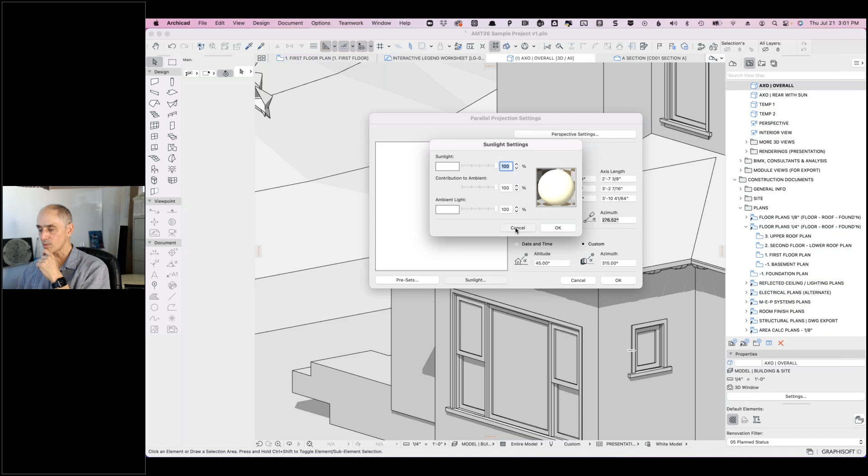Okay, so the other thing I'm going to look at is under the 3D view options, 3D projection settings. Right now, the sunlight, we've got it as 100% on all sides, so it's as bright as it can be. But where is the sun? Well, the sun is behind us here. Let me just move the sun around to here, just to see if that affects it.

Well, it did affect it, but not necessarily the right way, because basically we can see this is in shadow, that's in shadow. So the fact that we have shadows turned on means that we're getting some darkness. So we may be stuck at this point regardless of what we do.

Understood. But I think that what you explained in terms of the vectorial line work, that could get me over the hump in terms of getting the resolution I need for this. And I may just need to let go of the need for shadows. Yeah, now, high school coloring book, so we may just let the kids figure out the shadows.

Well, there is that. Now, the other thing you could do is once you've got this exported and put it into a photo tool, you could do some sort of threshold thing where if it's lighter than this dark, than this shadow, make it white. We literally can, in Photoshop, say I'm going to posterize it. I'm going to say anything lighter than this will make white, anything darker than that, maybe I'll leave unchanged. So you could do that.

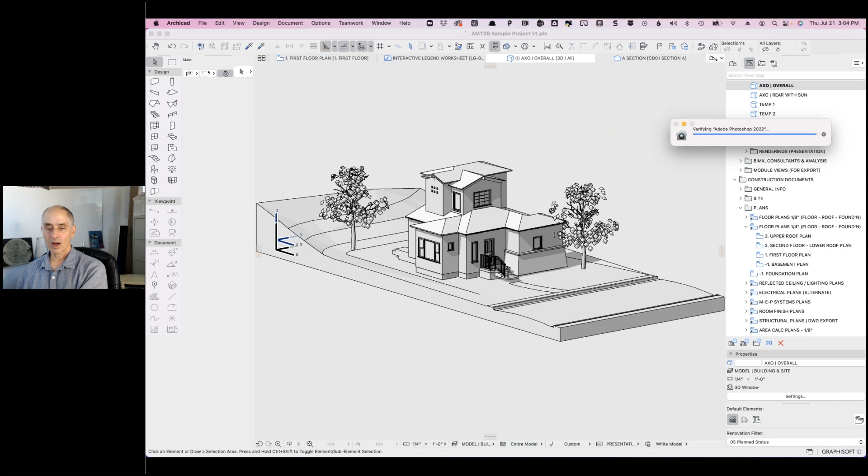Now, Doug Muir says you can get a large sheet size in rendered view. Yes, if you wanted to render, Doug, using the photo rendering settings, you can. It takes longer, but of course, Saxon, you may only be doing a couple of images, so the time is not a big issue.

But let's see, I have Photoshop open here. I'm going to tell it to open that last PDF. So here, this one. And when you open a PDF, let's see, so here's 300 pixels per inch, and I'll say that it's not going to be the bounding box, it's going to be the media box there, or I don't know, sometimes crop box, can't remember, art box.

Okay, well, I think it doesn't matter, I'll say media box here. And this is how big it's going to be in terms of pixels, so it'll have plenty of pixels there, 300 pixels per inch, so we can set that. And we'll just say okay, well what happens when we do that? So you can see this pattern here, that's saying it's transparent, there's no data here.

I'm going to just put in a new layer behind it that I'll just fill with white. So I've got white in here, and I'm just going to use a command to fill it. So now we can see that.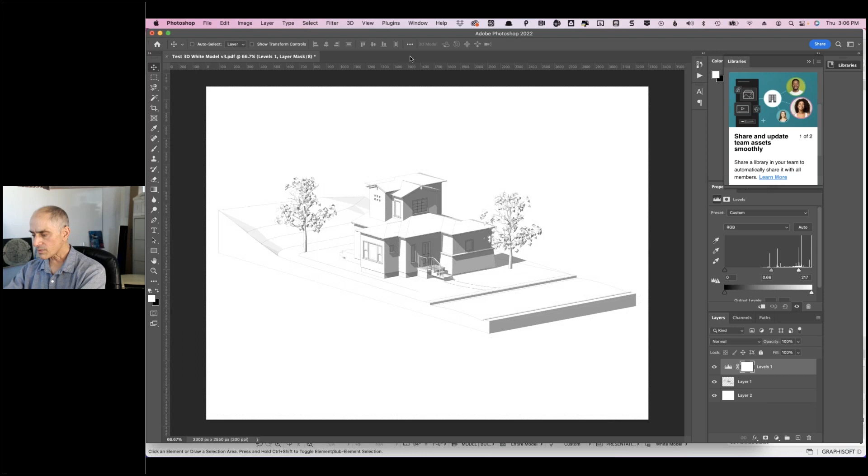So by tweaking this a little bit, let's just zoom in on this. I think if I zoom in, you can see I've still got line work. Here. And by changing this, I can get it lighter and lighter.

I see that. So there may be someone who could figure this out where it ends up being functionally white with outlines. Now we're seeing it so thin because that line work was infinitely thin. So anyway, there are some things we might need to experiment with to get that, and it does look a little pixelated right in here, although other stuff not so much.

But if we go out, it's not so. So anyway, you might have to do something like that to be able to retain some shadows but have the white. But of course this is medium gray, and I'm not quite sure.

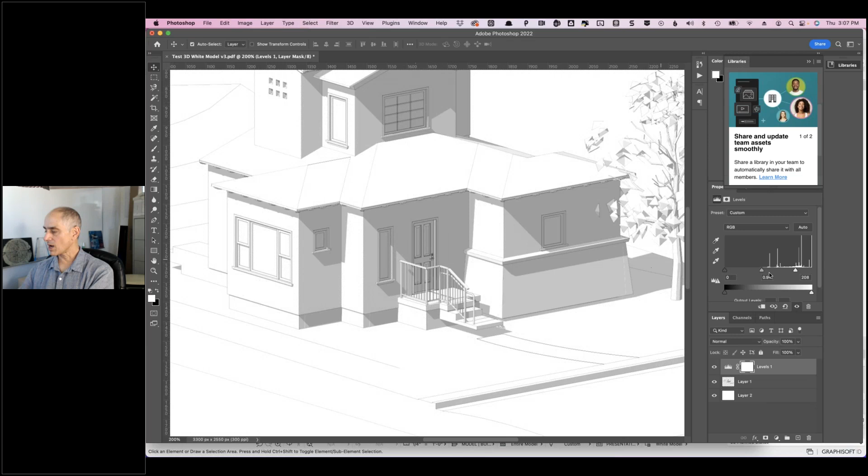If I make that white there, so now I'm getting it virtually white except for shadows, right? I think the way you had it before was okay because you had enough whiteness on those areas there.

So anyway, you can play around with this and experiment with output. When you print it, what does it look like there? So there may be some other settings in Photoshop that might do this even more intelligently or something like that.

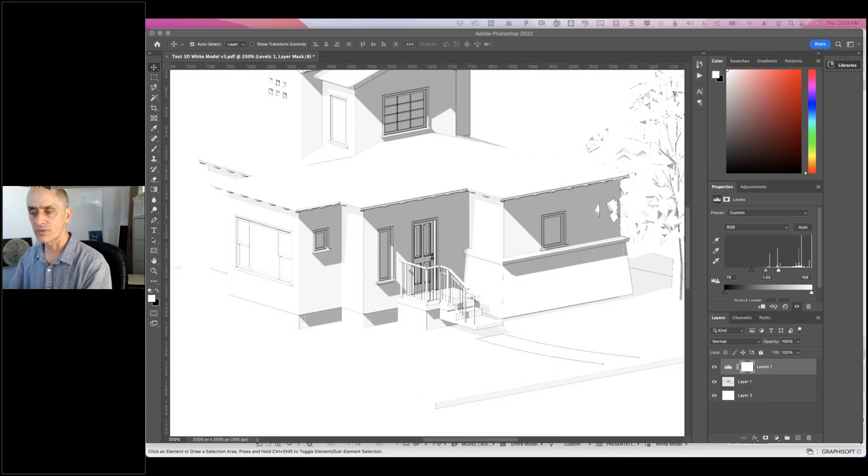Thomas Pisaris, Thomas here? Yes, you are. Okay, Thomas, you said windows and complex walls display properly in plan, but not in sections or 3D. They appear outside or inside the wall line. Okay, that's a relatively simple question to answer, so let me do this one as the last one. It is not intuitive in the sense that I wouldn't have figured it out, well, I might have figured it out, but somebody else pointed it out and I said, oh, that's how you do it. So Thomas, your line is open and this will be the last real question here.

Okay, so let's go to my AXO here. So Thomas, your line is open, hope you're still around, your microphone, you're still listed. Okay, so I'm going to go in and demonstrate this. Let's see, how do we see this?

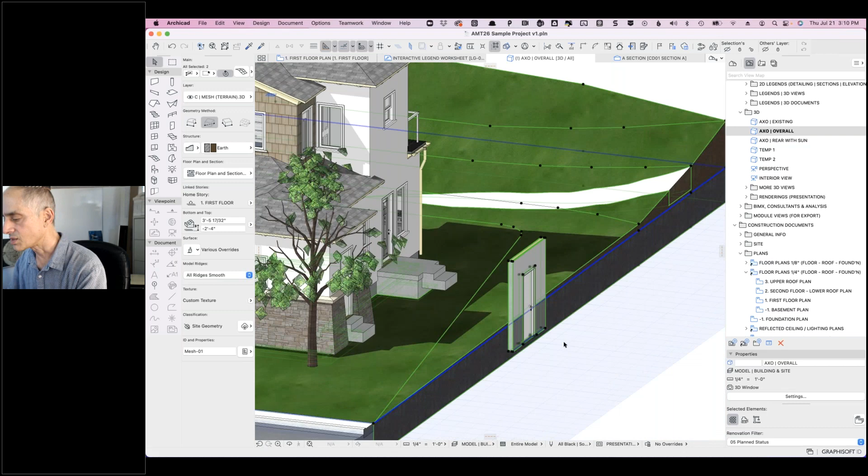Okay, so let me take... I'm going to drag a copy of this wall, drag a copy out, and just... okay, here's this. Now this wall here is a complex profile.

If I go in to edit the selected complex profile.

So Thomas, are you there? Yes, I am. Perfect. Can you hear me?

Yes. Okay, so what you'll see is that the outside of the wall, if I select this, you can see a couple of dots here and stuff like that. This bottom part of the wall is set as generic exterior.

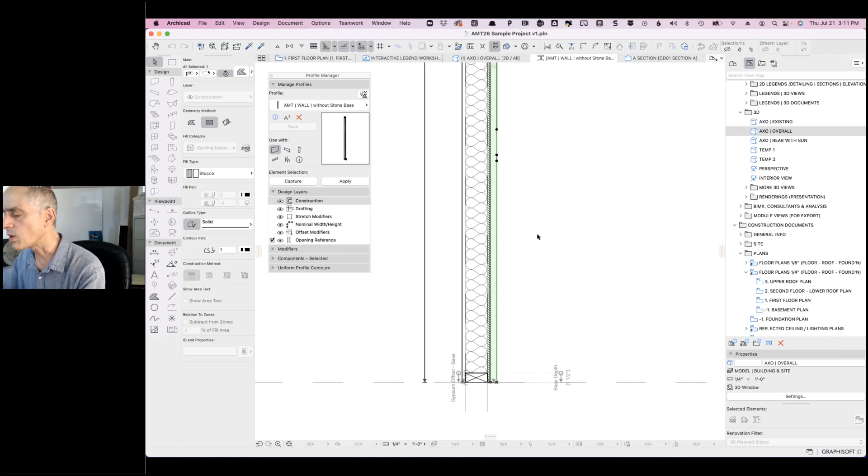Let's see... I think... okay, I'm not quite sure. What I'm going to do, I'm just going to demonstrate. Let's see if I make this have a bump out. Okay, and see that's the opening, that's a line here. Okay, so let me just apply this.

Oh actually, I wanted to, yeah, and it's stored it here. Okay, so if I go back to 3D, and there we go.

This door is still sitting properly in the wall, and it is because, no, this is a sill sitting to wall base. So this is working properly now.

I wonder if they've changed it. It used to be that if you had the sill here and the wall was thicker here, that this would pop out.

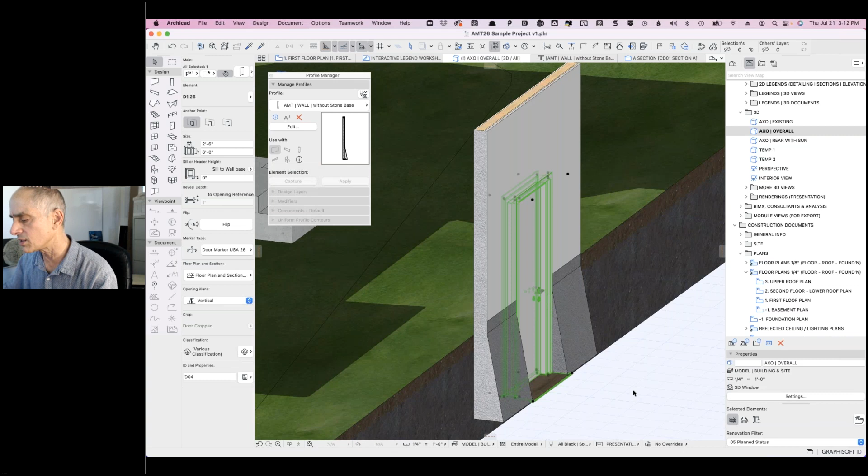Now let me just look on the plan, because I think maybe sometimes the issue is only seen on the plan and not in 3D.

Now, where is the? It should be this one here. Oh, here it is. Okay, no, this is looking pretty good. So,

I wish I had a dramatic example to show, because I know what your issue is: that the door would either expand the frame to go out to here, and therefore have this weird looking frame in 3D and in plan, or just move, something like that.

And the solution, now maybe they fixed it in version 26, was to say, although I know I want it to be 0 relative to the wall base, I actually would prefer you look at the height of the header relative to either the story or the wall base, which in this case is 6 feet 8 there. And that would then say, well, how thick is the wall at that point, at the head, and it'd say, all right, I'm going to fit the door in based on the anchor.

So that was the solution I was shown, and I went, oh God, I would have never experimented with that to figure out the anchor point here. So check that out, but it does seem like it's working.

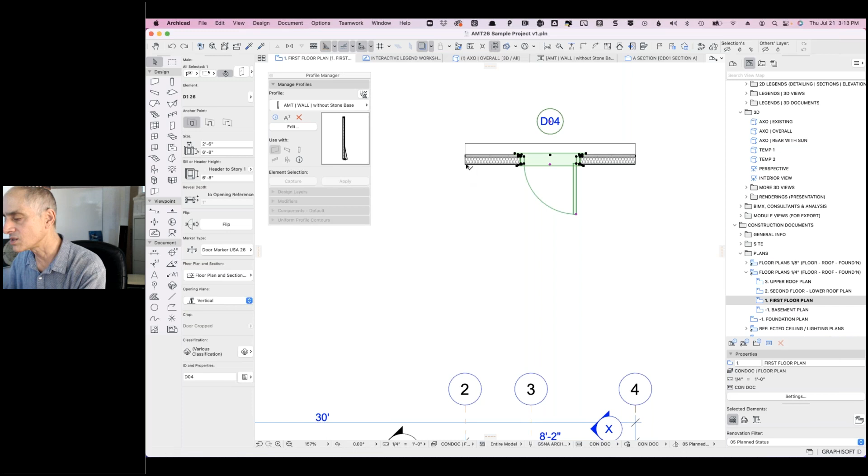There, I'm just going to undo this, just do one more thing. If I modified this wall on the fly, let's just see if it's different if I use a different wall type.

We have AMT wall without stone base, and do I have AMT sample stone base wall? Okay, that's still working properly.

So this one, if I just show in 3D, you can see this. Earlier, what we had in other versions of Archicad was this door would pop out based on the thickness of the wall.

Is that what you're experiencing, Thomas? Yeah, it's out in space.

Okay, so if you're in versions before 26, the solution was to say, this door... oh actually, let's put it into the header to story 1 here. Okay, look at that. So there was a subtle difference here, but it still looks fine.

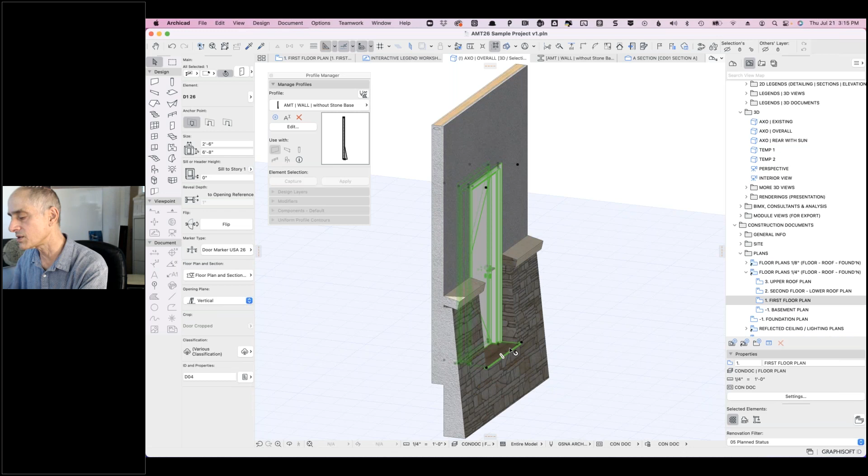I mean, it's still clearly related to the main part of the wall. But in version 25 and earlier, or the last time I checked anyway, if it was anchored at the sill, it would get messed up. And of course, at the head, in this case, is simple.

Now, the other thing you need to do just in general for these walls, and let's switch to the one I'm now using, the stone base wall here, so it's a little bit more detailed, is that you need to have opening reference lines.

Let me just... design layer, opening reference, turn this off or on. You can see that there's this line here.

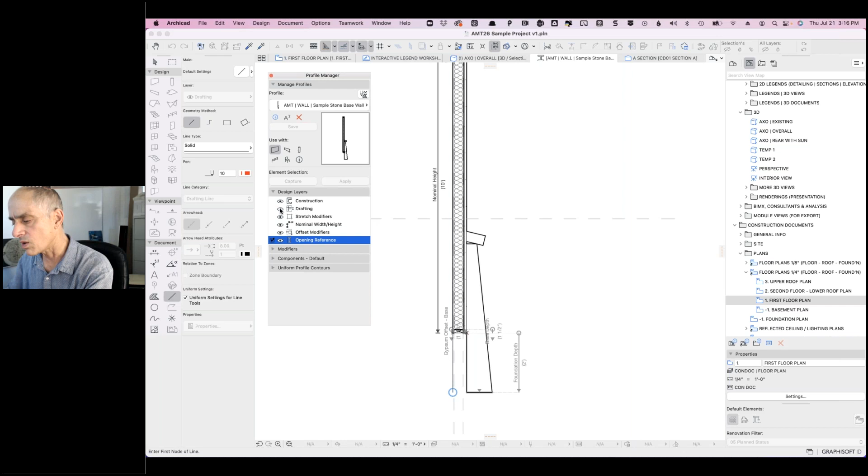This basically says, where is it, what are we measuring from? Let me turn off all of the other things so we can see just that. So these two lines are the opening reference, and basically this is the thickness of the main part of the wall here. So you definitely, it was always the idea you would have these lines saying where are we measuring from when I say it's at the face of the wall or it's inset, whatever. So you'd always make sure you had this here active.

Now, but what I found was frustrating was it ignored that if you had stuff sticking out, if your anchor point was down at the sill, it would say, oh, your wall is really thick. And I say, no, please use that opening reference line I gave you, and it would ignore it. And so the answer was, well, tell it to look at the head. So that's what happened there. But it looks like in version 26, they fixed it.

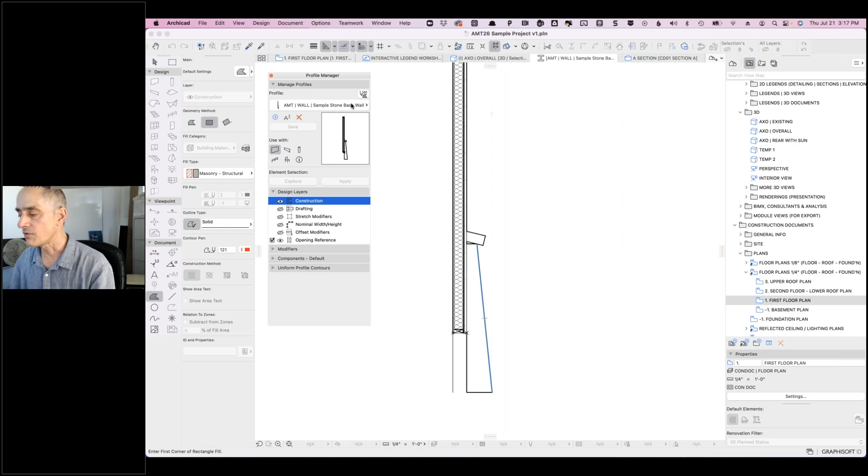So one of the wall sections I'm using is the foundation, one of yours from the AMT selection. And so maybe the width of the footing down below, it's taking that for the width of the wall as opposed to the actual width of the wall. So if I go to one of the footing ones here, let's see, profile, foundation footing, sort of a simple... actually that's not one here, stem wall single.

All right, so normally you don't put a door into a wall like this, but of course if you made it tall enough you could, or maybe you're using a slightly different one, but you can see there's no opening reference. If I turn that on, you can see the reference is now out here, those lines. So if we were to put an opening into this, we want this to be moved into position. So those are the opening lines, which we can hide or show in our working view here, but this activates it.

So if you have something with a big spread footing and then it goes up and you're putting the door in up above, then you just need to make sure you have the opening reference lines indicated. And these lines, actually, you can have them on an angle, you can curve them, you can do all sorts of stuff. You can actually create more of them. I think you can drag copies, so you can have a lower and an upper, depending upon what's appropriate there.

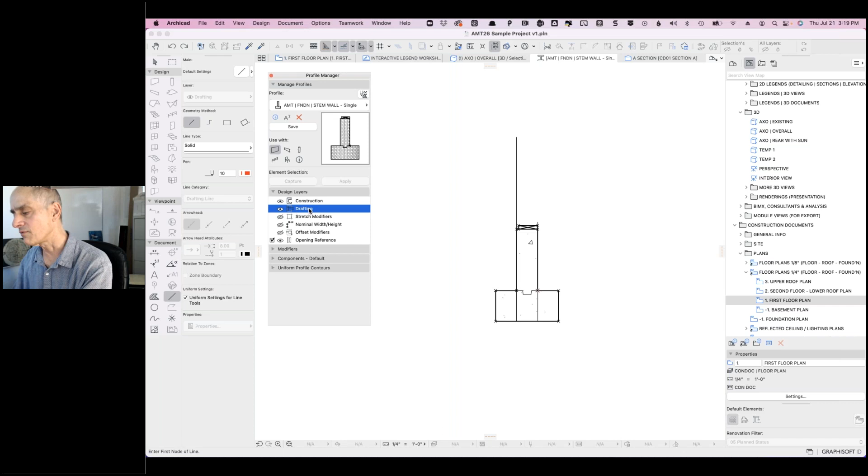That's interesting. Got it. Okay, yeah, this is design drafting, there we go. All right, so when you draw it from scratch, it's going to go on the drafting layer as a line. But if you copy one of the ones that's an opening reference, then you can have more than one. Or I think you can even, if I select this, modify it - you can make it a polyline essentially here. But generally what you want is just the simplest thing: it should go up as high as the wall is, as high as the opening would be.

Maybe it's not tall enough, that could be it. So you want to just say how should Archicad calculate the opening face based on this line? Okay, thanks, all right.